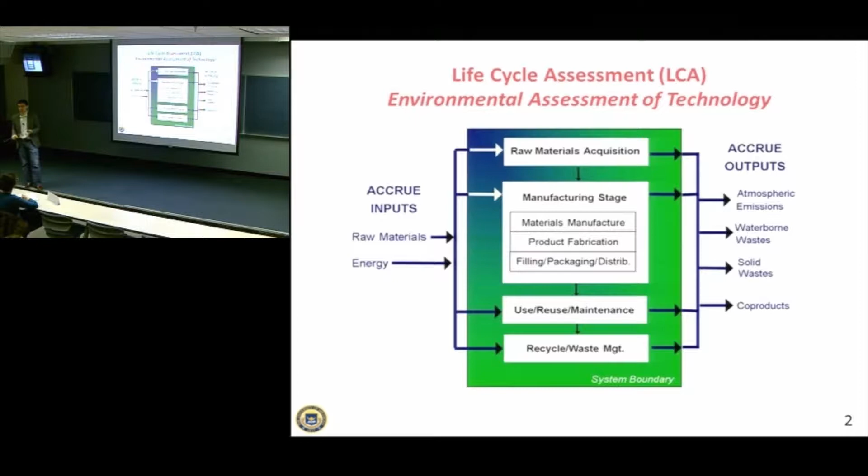We discussed what LCA is, and we talked about good LCA data and bad LCA data, and we talked about protocol there, and we tried to be really clear about what you can use an LCA for and what you can't use an LCA for.

You can use an LCA for the study of something that exists. If it's being used in a design context, as long as that design is not radically different from things that already exist, you can use literature data to infer what you might see going forward.

We use the example of the aluminum-intensive vehicle. The idea that if we lightweight the vehicle, that's great in the use phase, but there are some additional production burdens. So you want to think about the trade-off there and how long it takes for the emissions you invest in the production stage to actually be made up for in the use phase by higher fuel economy.

And LCA is great at telling us, maybe it's going to be about 3 years if your aluminum comes from North America, but we talked about geographical context, and we talked about how even in different temporal contexts, maybe your answer is going to change. And even today, just looking at aluminum that might be sourced, a typical kilogram that might come from China, that payback period might be a lot longer.

So these are important studies in and of themselves. When we start talking about sustainability, as opposed to a life cycle assessment, they're broader questions, and we went through these questions before. Would people buy such a car? Would producers have an incentive to make such a car? And if there was an alignment of those incentives, where would the aluminum come from?

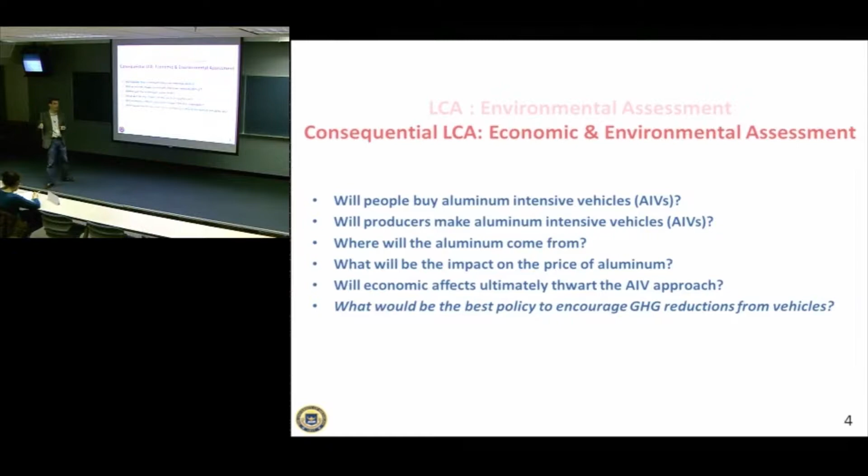Government can incentivize technology, it can incentivize research, it can tax or subsidize companies and consumers. So there are a lot of levers that are at play in the system, and ultimately, if we're thinking about an example of passenger vehicles and the desire to get the carbon emissions down significantly, the space here to act in is very large.

And how do we move beyond the food fight that exists? You've got producers saying that every cost-efficient technology has already been put on the vehicles, so there's nothing more we can do. Or the argument you hear more often these days, which is consumers will never go for it. On the other side, environmentalists say this is an imperative and company profits be damned.

So these are extremes of the argument, and rational people are somewhere in between. But the point is, how do you sift through this system in a quantitative way, the kind of way that engineers might be used to attacking a problem?

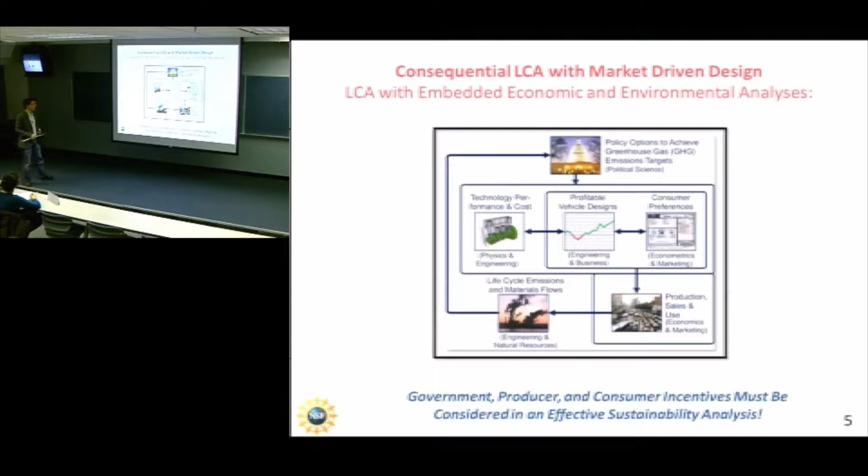So that's where we're going, and we're presenting the work in this direction that Katie did, and I'm basically expressing this the way she expressed it. I think she did a really nice job.

What I'm going to do is keep this as high level as I can, and I'll mention where appropriate that going from this slide to this slide represents about a year of work, and it's not a trivial thing. So we'll talk about the disciplines involved as we go through.

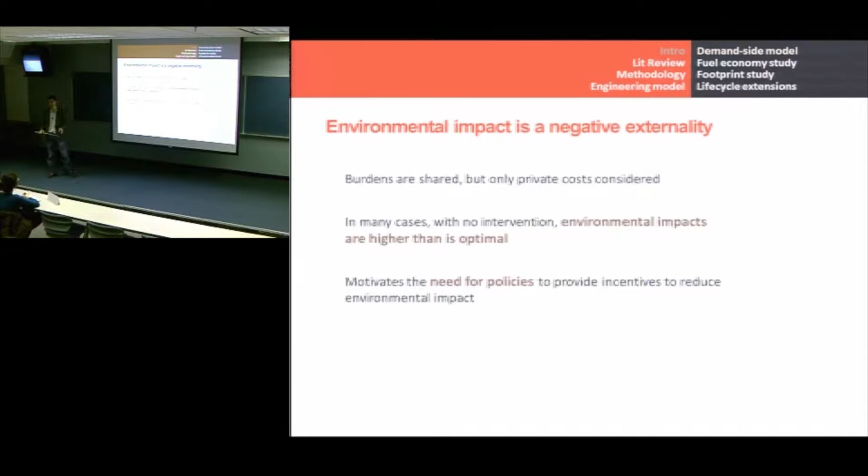And that's where policies come in. But the question is, how do you design policy, especially in a complex system such as the passenger vehicle market?

We're beginning to see now, if we take the U.S. fuel economy regulations out, more progressive regulations really in the last 10 years. Government creating incentives, let's call them carrots and sticks, to affect the design of products directly. So we're going to ban incandescent light bulbs, for instance. Fuel economy regulations have been at play for a while, but even the reformed CAFE standards kicking into effect now have a footprint basis—normalized to the size of the vehicle—and there's a design implication there.

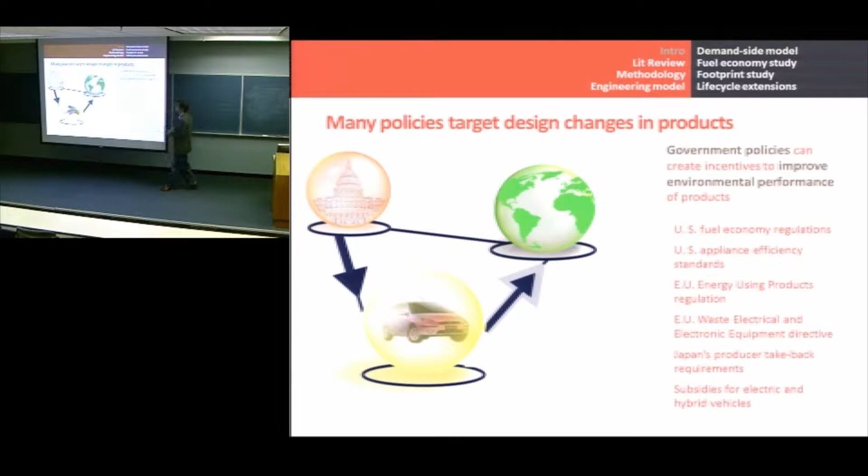Appliance efficiency standards—we've talked about the Energy Using Products Directive, the recycling directives in Europe, similar things going on in Japan. These days we're seeing subsidies for electric vehicles. So government is realizing that, especially in austere times, an ounce of prevention is worth a pound of cure, and therefore, let's see if we can influence the design stage. And that's obviously a tricky business.

So the question to ask is, if government is going to be involved in the design of products through regulation, where's the methodology? Where's the class that teaches you, or teaches them, how to do this? The point here is that it really doesn't exist. And the answer to this question—can a policy induce a desired design change—of course it can. But what's the systematic methodology to know whether you've got the right policy, and what other, perhaps unintended, consequences may arise from implementing it?

We need methods. It's somewhat self-evident, and we've discussed this enough times now, that if you're going to answer these two questions, you need to understand the interaction between demand, the engineering trade-offs and constraints driven by physics, and the economic structure of the industry and the costs of technology. There's existing literature in engineering, in economics, that's beginning to move in this direction, and even in life cycle assessment, moving this way too.

But they're sort of converging on a target—I would argue that before Katie's thesis, it really hadn't happened. So what's outlined here in this presentation is just a high-level overview of what's going on in the disciplines making contributions to this problem.

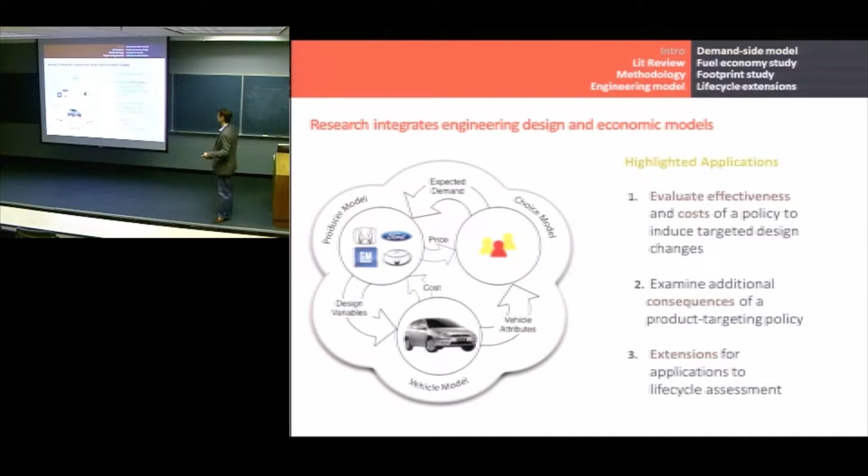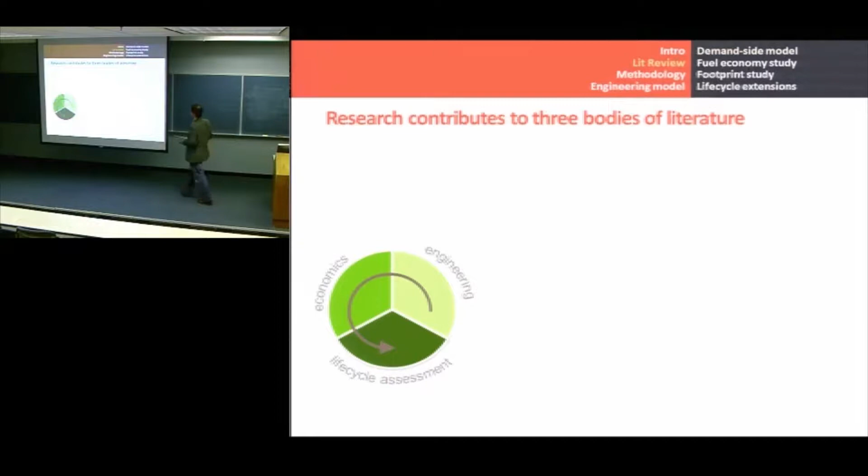Okay, so I've covered these 3 areas already: engineering, economics, and life cycle assessment. Beginning with engineering, there has been a few pieces of work recognizing how policy and economic structure come together. Professor Jeremy Michalek is a graduate of 589. Back in 2002, I think he took the course, and it was his class project that actually led to about 3 PhD dissertations down the road, including Katie's. I won't talk about what his term project was because it might intimidate people—he really got into it. But it actually opened the gateways to actually do real-world problems.

He looked at a simplified market and simplified demand models, but he actually showed that you could bring these areas together. His student at CMU is Norman Shiau, and he's done some work there. There are also 2 other students that got their doctorate looking at work bringing engineering and economics together. In the case of Paniotis and Bart here, they weren't looking at the policy side, just bringing the economic models together with the engineering models.

When you think about the math of it, and you're trying to optimize systems, you're trying to achieve environmental objectives at minimum cost—this becomes about optimization. So beneath the surface here, you don't just stick fancy models into Excel. You already had bad experiences with the solver with simple models, right? So actually figuring out how to get solutions to these problems is non-trivial. Thinking about optimal design when you bring economics and engineering together—there's been some work in that area, but you can get a sense that this has not been widely or universally pursued. This is actually a new area. I call it market-driven design, and there's less than a dozen very active researchers in that field.

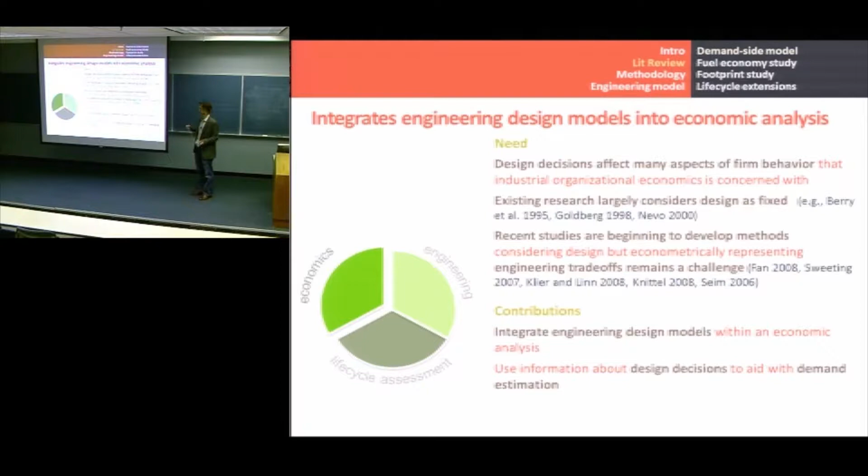The other thing you might be thinking is, what we're talking about here seems kind of obvious, right? And maybe more than one of you is a little frightened that this stuff hasn't really been going on the whole time. You just kind of assume there's so much money involved, and the greenhouse gas issue is so important, that they've nailed how to do these assessments. I don't want to say flying blind, because there have been a lot of studies, but what we're making a case here is that integrating the engineering into the economics is a pretty important thing, and really that has not been done in the kind of way most of us would be comfortable with.

So thinking about energy efficiency, now this is a bit more general, moving outside the world of cars. Typically we think about the idea of cost effectiveness. When EPA is considering applying a new regulation, they have to talk about what are the increased costs and what are the benefits to the consumer. Usually that cost-benefit analysis is as far as the whole thing goes.

What Katie is pointing out here is that there may be other benefits or opportunities that companies have to affect the design that don't show up obviously as increased costs or reduced fuel consumption or electricity consumption in the use phase. For instance, I may take a combination of technologies that gives me both higher fuel economy and higher acceleration. I can tune that combination of technologies so I'm not giving all the benefit to fuel economy — I'm giving some benefit to fuel economy, but also a benefit to acceleration, because people like that too, right?

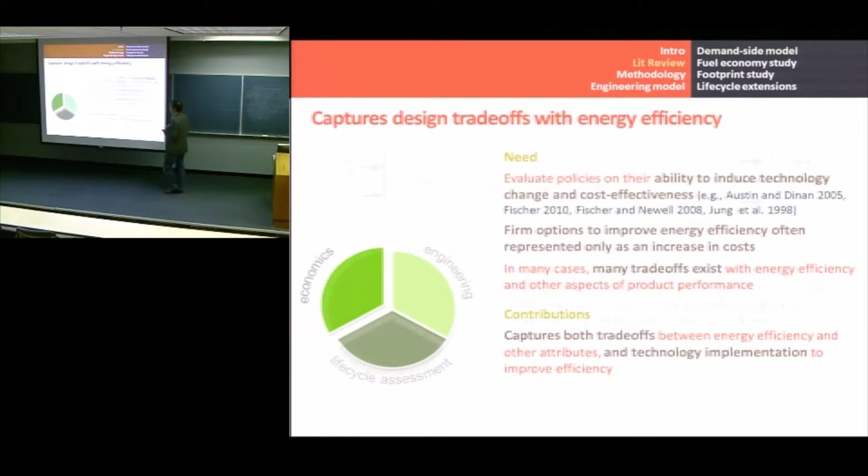A life cycle assessment we've talked a lot about, so no need to say more about what that is. What I may not have mentioned when we talked about consequential LCA was that the studies out there deal with market systems that are subject to perfect competition. Generally what we're talking about here are commodities.

A good example is fish stocks. Salmon is salmon, unless you try to sell Alaskan salmon specifically. If I want to look at Atlantic salmon and I've got a bunch of boats fishing, if I've got too many boats, the stocks deplete. As those stocks deplete, I may be more enticed to look for other fish. So if I'm interested in how fishing of salmon affects cod, fish has come up too many times this term for me to know nothing about fish, but the point is how one commodity might affect another.

That's different because you're not designing the salmon, you're only making a decision about the quantity being fished. There's been work done in that area, and some work done on ethanol. Ethanol is ethanol, it's a commodity, but you can ask where did it come from, corn or sugar? In these cases, you're just looking at a single situation - they're not designed products.

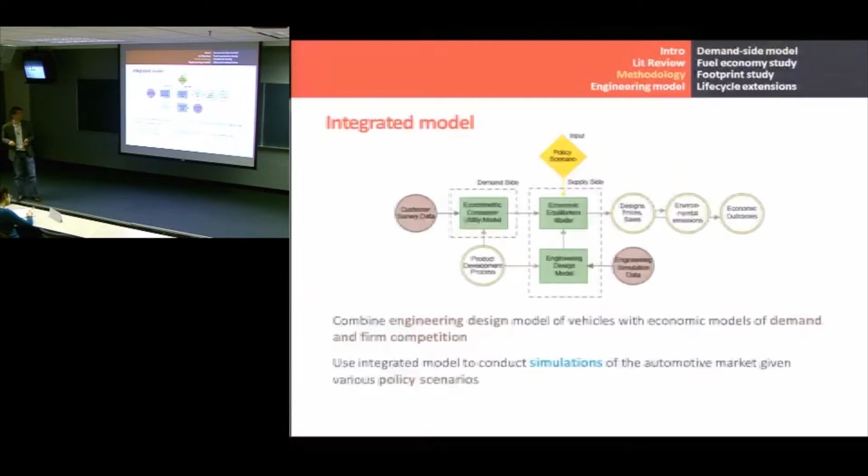So two challenges now, summarizing. First, there are engineering trade-offs between fuel economy and acceleration, and suppliers can basically tune how they land their acceleration and fuel economy by adding new technologies, and that needs to be considered in an analysis of how effective a CAFE standard is going to be, or whether cars are going to get bigger because of a CAFE standard. So there are engineering trade-offs that nobody's really addressed before, and then this idea that if companies are going to take on technologies that are uncommon today, then we really need that engineering design component.

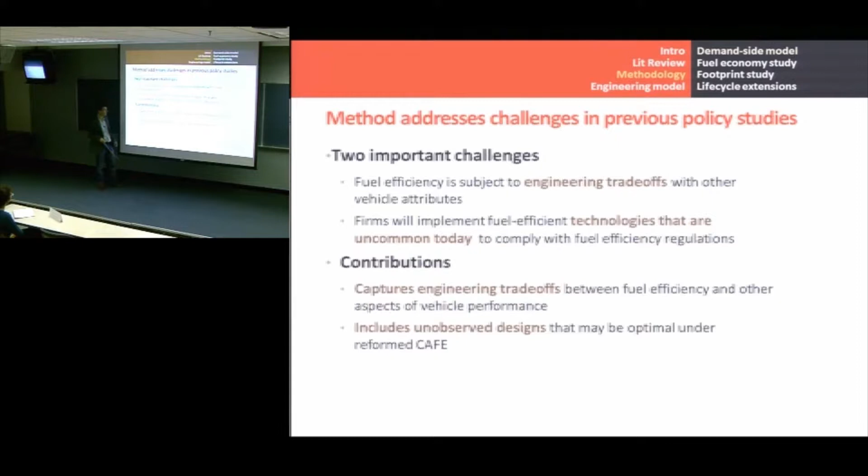So walking through here now, the things that need to be thought about, beginning with the product development process. We've talked about the importance of focusing on the medium term, and this gets into some technical issues, but basically describing the product development process as a three-stage process.

So you don't decide the price first and then figure out the dimensions of the car. This is sort of your order of operations for product development. You begin with a concept that has the vehicle segment that this car is going into. You've got a certain powertrain architecture going on there with certain dimensions. And then the concept gets approved, and now you say, okay, we're going to design the engineering subsystem.

We're going to make a 4-liter engine versus a 3-liter engine. It's going to have a certain number of cylinders. We're going to throw some technology on there. Maybe there's going to be some cylinder deactivation. You don't do that up at the front, and you can't change it after you've started production.

Pricing occurs after production, and if you pay attention to these things, you see they change, right? This is important because if you're going to estimate a model, if you're going to try to figure out characteristics of the market from market data, you need to be able to tease out some factors relative to others. So if you know that at this point or at this point here that some of these things are static, it actually, from a technical perspective, helps you perform a better estimation.

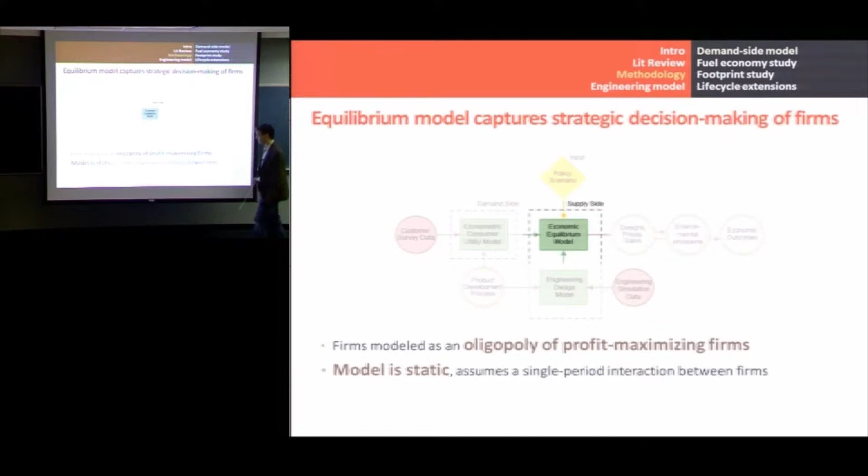Model is static versus dynamic. Okay, some math—don't get scared, this is not anything tricky here. This is profit. This is one firm.

J are the cars that the company is planning to make. So maybe I'm a car company and I have 75 vehicles or 100 vehicles, and each of those is a J. I have a quantity sold for each of those cars, and for each of those cars it has a price and it has a cost. So it makes sense that profit is going to be the price you get minus the cost times the number you sold. And then you just look at that for all the cars.

Maximize the profit. You're going to make sure that this is subject to any regulations, like the CAFE standards. And then there is some technical business going on here.

Basically, what Katie shows through some engineering reasoning is that you can create a function of the acceleration of the vehicle plus the technology that's been slapped on it to figure out its fuel economy. EFF is efficiency—fuel efficiency or fuel economy. What this says is that there's some fixed and variable costs, and you can figure that out as a function of the acceleration and the technology.

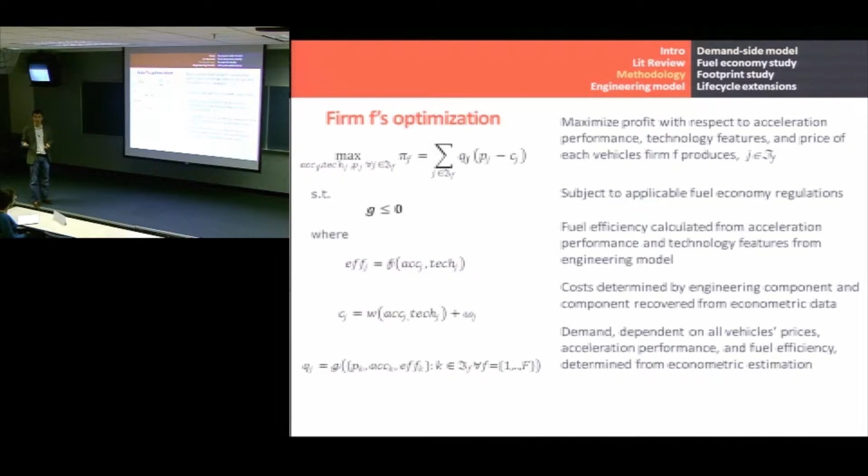And then your quantity demanded is going to be a function of the price. It's going to be a function of acceleration. It's going to be a function of the fuel economy as well as the structure of the market. So yeah, to understand the details here, it's a little bit to think about, but nothing is particularly counterintuitive going on. And as I said already, that was one firm's profit function.

Well, there may be 20 firms there. So what she does is start with an initial condition. Let's say there's 500 cars, and let's say there's just 10 firms, so I can do the math in my head—that's 50 cars per firm.

So what I do is initialize the run, and I say, okay, they have a certain gear ratio, they have a certain engine size, they're using certain technologies, and that means directly out of that there's going to be an acceleration, there's going to be a fuel economy, there's going to be a set of prices, and a certain profit. And that's just like an initial guess—it's not coming from anywhere. So you initialized all the firms.

Now, firm 1 is going to look at the other 9 firms, because I just said there was 10 firms, and say, okay, given their initial condition, here's my optimal set of prices, here's my optimal design. Then firm 2 is going to look at what firm 1 did, and the other 8, and make a decision for itself. Then firm 3 does that, and firm 4, and it's going to go around and around for about a day—if you're lucky, maybe 2 days—and you're going to converge on an equilibrium point.

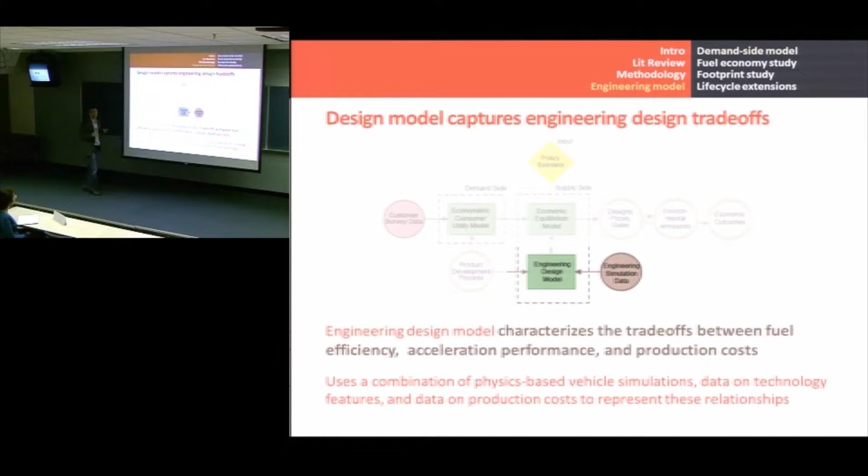So we've got now a model of equilibrium. Now we need the engineering design model and the consumer utility model. And everything I've set up to now turns out to be pretty easy, but these 2 boxes, especially figuring out how to do it the first time, that was maybe worthy of 2 PhDs.

So if you just look at the technology combinations, let's count: 1, 2, 3, 4, 5, 6, 7, 8 technologies. So basically I've got 2 to the 8th combinations, maybe 256 combinations of technologies. And each one is going to have a different cost, a different impact on the performance of the vehicle, and the market's going to respond differently to every one of those.

So you can imagine if you just try to brute force this, enumerate it. Remember the coffee maker disassembly problem, where it would take 16 years just to look at the disassembly combinations. This maybe has fewer innate combinations, but because you have to run this game theory every time, forget it. There's no way you could just brute force this out.

So what Katie needed to think about was a bunch of things. One is, how are you going to code this problem in a way that is realistic but can be tackled by a computer?

The first thing you do, like in the disassembly problem, is look for combinations of solutions that make sense from a cost perspective. So if I've got 256 combinations I can put on any one vehicle, and the largest firm has 116 vehicles to optimize, I'll only look at maybe the compact segment, say 70 of them that are cost effective. The other 180 or so don't make sense, because in any of those cases you could pick one of the 70 for the same money or less.

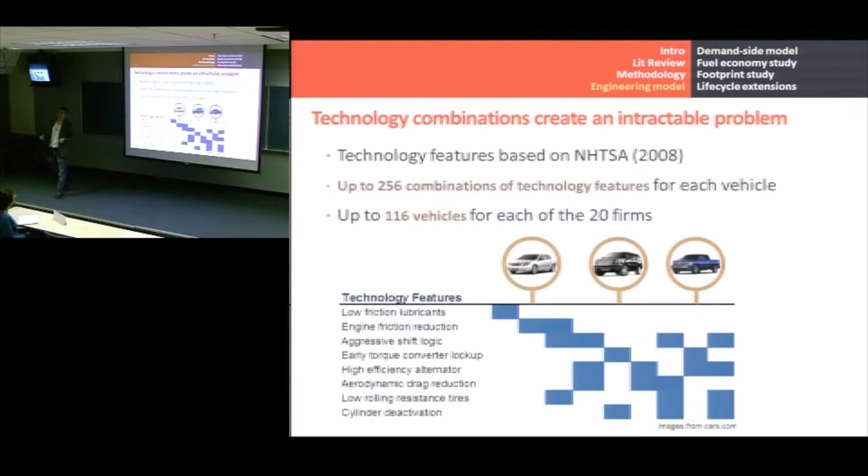So she had to establish the cost-effective combinations of technologies. She also then needed to map those technologies onto each segment.

So what she did was look at 7 vehicle segments defined by EPA, and then modeled a representative car, maybe a Civic. For that representative car, without any technology on it, figure out what the trade-off is between acceleration and fuel economy if you just change the engine and the gearing.

I may not have every one of these options, but I can model it as a continuous curve. By having continuous curves, the optimization is a lot easier. If you just look at discrete points, it becomes a nightmare. So that's part of what's going on here.

And then you can work your way down. If you want to break out of this curve and do better in both acceleration and fuel economy, you slap a technology package on there. So maybe technology combination 1 gets you this curve, and technology option set 2 gets you this other curve.

After you're able to produce the first curve with your baseline vehicle, and model how these technology packages would look if slapped onto that baseline vehicle, you would then think about what the costs are. What is the cost of being here versus the cost of being here? And then you would construct a cost curve this way.

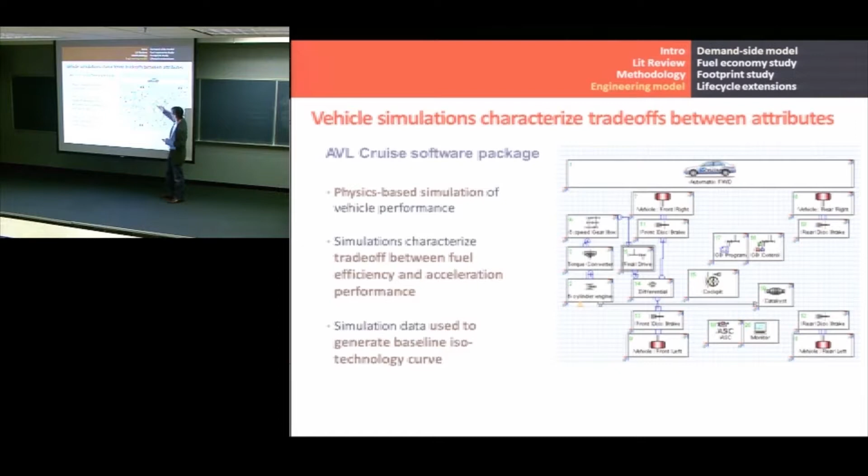So looking at the baseline model here, these are the representative vehicles.

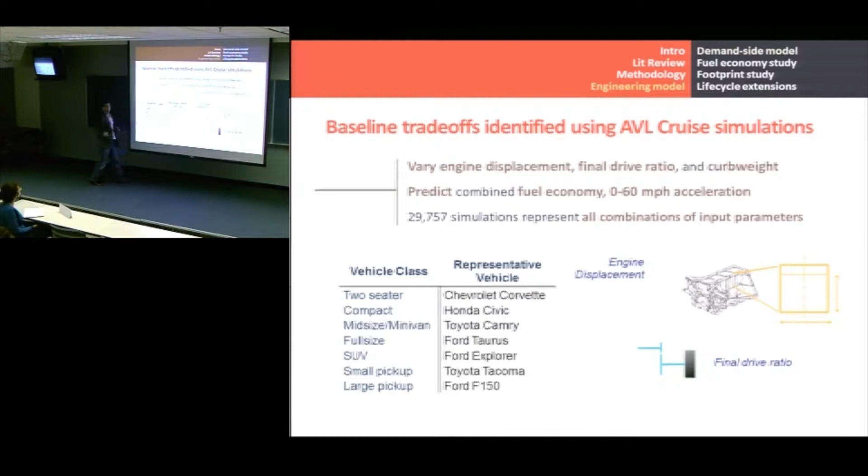And I've mentioned already the engine size, changing that, changing the gearing. Oh, and the curb weight's an option here too. Curb weight wasn't a decision variable, but it was one that she carried along in her simulations. And again, about 30,000 simulations, so that took some time itself.

The costs also came from EPA and NHTSA. So thinking about now, this was the class project actually in 589, this was part of the class project. It's figuring out how engine costs vary with size, and then looking at, from the literature, the cost of technology features.

And if you're using two technologies, in her model, she's treating the costs as additive, so that there may not be an efficiency between, say, turbocharging and cylinder deactivation or something like this. And there's some support in the literature that this actually makes sense, but

Katie was not using the secret store of data that companies might have on these actual costs. So basically, just talking here about the cost being additively separated here.

So I mentioned this too. How do you get this baseline curve? These are her simulations, and maybe this is your Honda Civic. You're looking at the different engine sizes that might be simulated in AVL Cruise.

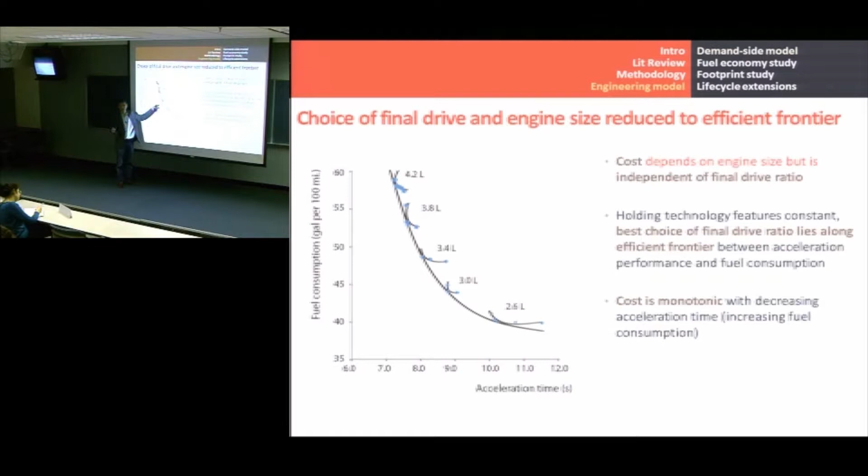So she actually used the AVL Cruise to figure out what those acceleration values would be. So that's how she actually made these Pareto sets here. Okay?

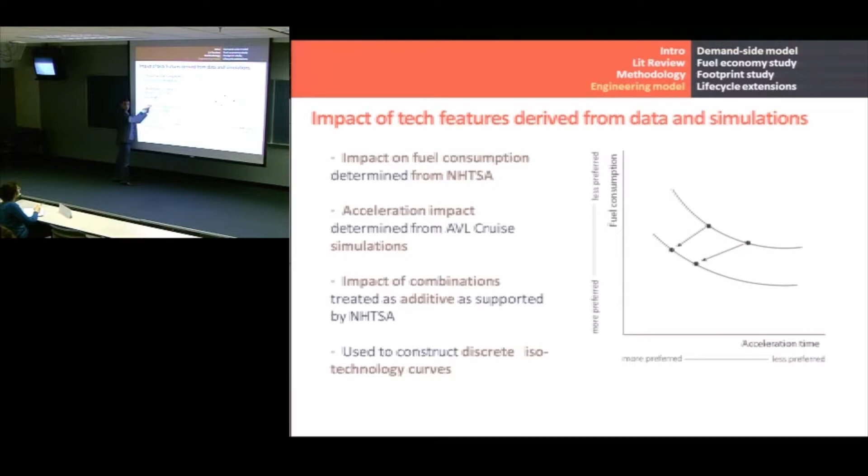So the impact on fuel consumption for a technology came from NHTSA, a couple of cases EPA, and then she actually figured out what the acceleration impact would be. And that allowed the creation of these curves.

Okay? So I basically said this already, right? You've got the baseline vehicle, and then you've got levels of this technology variable. And then she's treating this technology variable as if it's continuous.

So there's really two things going on here. One is, when I explain it, it sounds like a lot of work, but it sounds doable, and that's true. But one of the contributions was actually thinking through the process to achieve this, and that was not easy. We hit a lot of brick walls before we came on this.

Okay, does it make sense? Basically, what's going on in the engineering side of the equation? What needs to happen? That's why engineers need to be involved.

We didn't have costs, and the further we got into this, the more we began to realize that maybe the people who are actually making the decisions about design, they may not fully understand the costs either. And so, we basically, from the outside then, we built our own model for both fuel economy, it's called EFF here, and cost.

So K's are model parameters. You don't want to ask how she got this model form, because that model form is just brute force. Let's figure out what works. You see some exponentials here, some linear terms, some quadratic terms. There's a lot of brute force going on there.

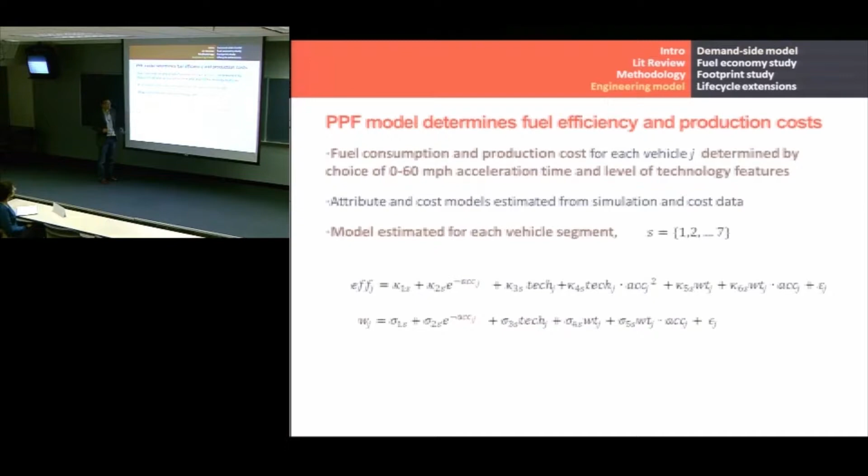So we didn't think that it would look this good in the end. We'll take it. I mean, you'd like 0.99, no doubt. And probably that model form is out there. But considering all the things we're not modeling, we'll take it.

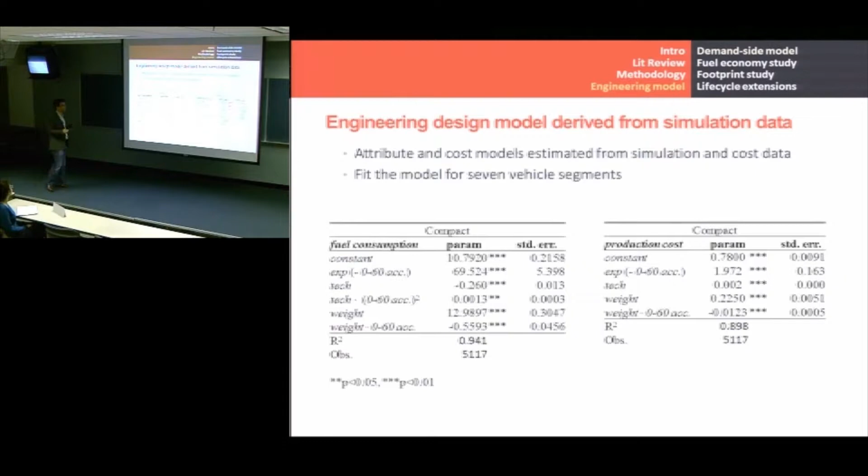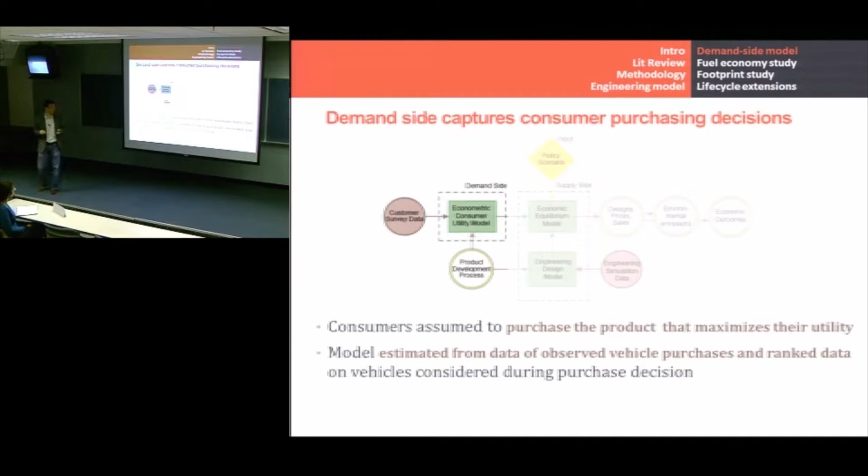If you thought this was hard, I think you could follow that. This part, this is at least two courses in economics, maybe three or four. This is a model of utility. So you're looking at utility here.

There's no way to observe utility. Utility is, I've got a car. I drove a Subaru today to work. What's my utility? I got no idea. And there's no question anybody can ask me for them to figure out what utility is. It's just not really a knowable thing.

But what you can do is try to come up with some structure to the utility, and then say, I don't really know what utility is, but I'm going to make an assumption that consumers are going to try to maximize it. And under the assumption that consumers are maximizing their utility, given the ability to observe the market, you could actually figure out what the maximizing utilities were and derive coefficients that say something about utility.

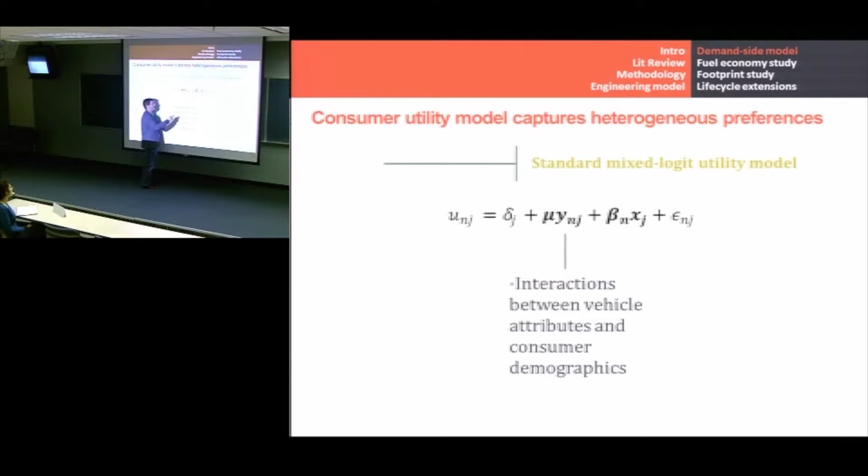So N is consumers, which are represented by their demographics, and J is vehicle.

Now, where this gets really tricky is that there are features in the system, leather seats, a certain styling, handling, noise, that really affect how much utility a vehicle has to a person that you're never going to observe. So you may have a confounding between things you are observing, like fuel economy or price, and things you're not observing, like luxury.

So that's where your courses in economics come in, and this becomes an art form. Something that doesn't look all that hard, say, well, this is just some Greek letters, I can figure it out in a day or two, becomes a lot of practice, a lot of research papers, and something that in practice is closer to an art form than a science.

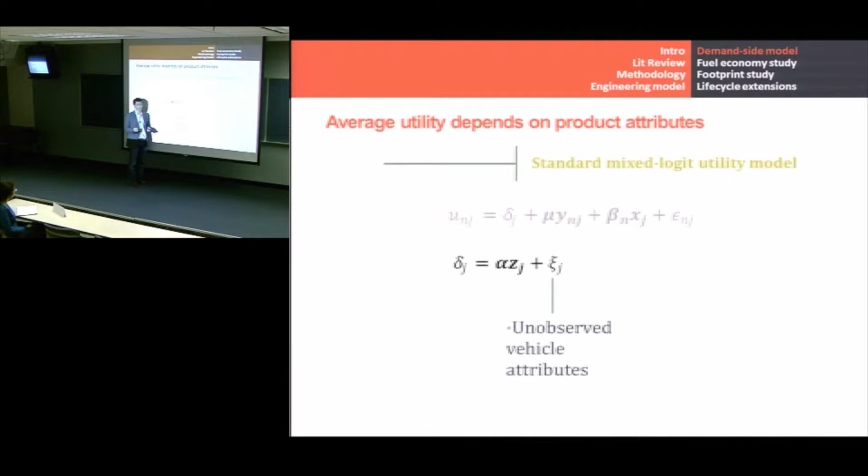Remember I said these new car surveys, they have the car that was bought, and then the second choice question of, okay, if you didn't buy that car, what car would you have bought? And if you didn't buy that one, which car would you have bought? And those data, a lot of those data were available to Katie. So basically looking at the one that was bought, the first choice, the second choice, etc., you can use that information to figure out what the alphas, what the mu's, what the betas essentially are.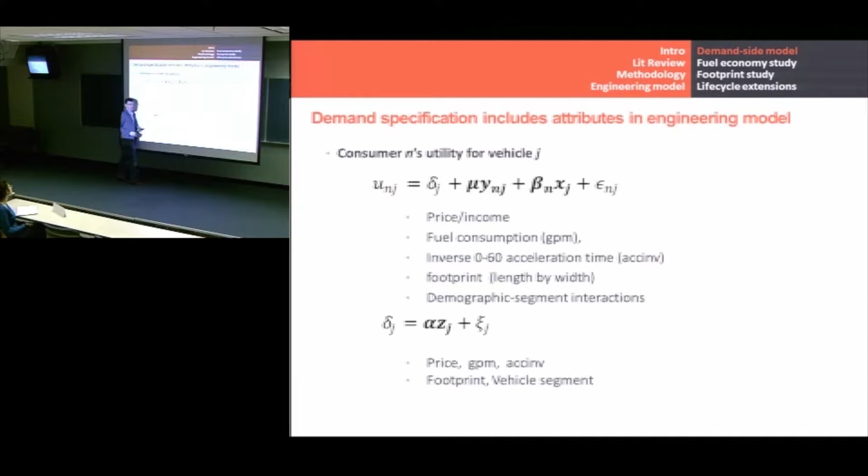And there's some heterogeneity going on here that I'm not talking about. But basically, you use the market shares that maximize the likelihood that what was observed in the market in terms of market shares, first preference, second preference, etc., were actually met. So that's how it's done in words. Obviously, it's tricky.

And in doing this, you can get a whole bunch of parameters. And when you actually do a sanity check on those parameters, you're glad to see that some things you would expect come out. First being that there are a lot of people who think about price elasticity. So if I change the price of the vehicle, then how's the market share going to change? You can compare that with what other people did using different methods, and if you get numbers that are close, you feel good about that, right?

That's good. You can look at whether the willingness to pay for improved fuel economy is less than the cost of the technology features. That's intuitive because if the willingness to pay for improved fuel economy is higher than the cost to put the technology on, you'd see it in the market already. So you kind of have this sigh of relief when you see this, right? So these are sanity checks. It's not proof that this model is good, but these are the kinds of things you can do in addition to doing statistical tests, which I just blew over on the last slide.

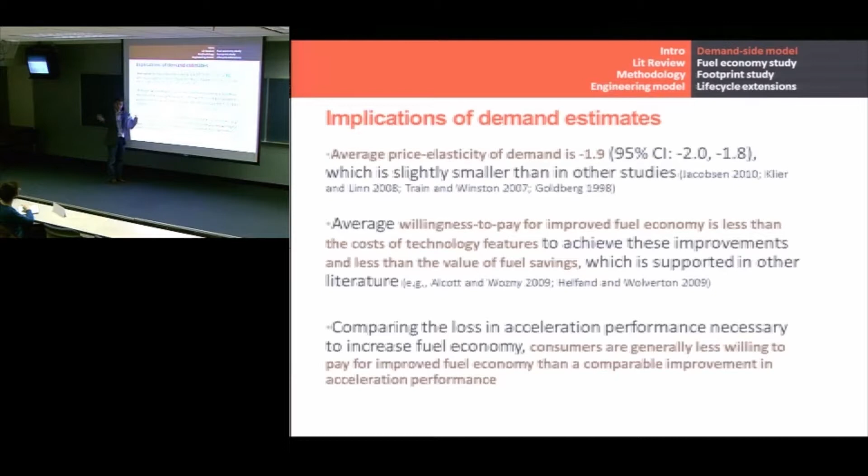It's hard. So when I started off the presentation today saying these economists haven't thought of design, I hope you didn't get the idea that they weren't smart enough to do it. They were. But they're busy tackling all these other challenges associated with these kinds of studies. It is not easy, and that makes Katie's work even more impressive because she's able to understand both and actually integrate them together. It's non-trivial.

Costs - so I've talked about technology costs. I talked about that 589 project that told us how engine size might be related to the cost of an engine, and I talked about NHTSA and EPA data that might help us understand what the costs might be for technology packages. But I didn't talk about the cost of the vehicle. Where does that come from?

Well, basically that comes from looking at the existing market, existing vehicles, right? Everything besides the engine, besides the technology - we need to understand those costs. So that comes by looking at the existing market. You assume that companies have set their prices to be profit optimal, which means you know the quantities, you know the prices, and you can then figure out the cost by applying first order conditions.

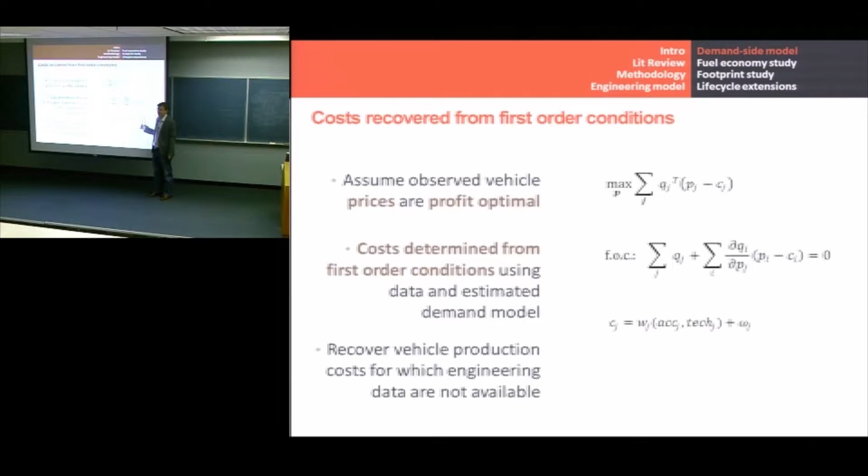Take the derivative, set it equal to zero - there's an equation that needs to be met there. And then by applying a certain structure to the cost equation, you can figure out what the costs are. Again, not easy, but it's doable. And those costs are going to depend on whether you're constrained to CAFE or not.

So here's another wrinkle: not all firms constrain themselves to CAFE, right? You've got some European automakers willing to pay the CAFE fines because they're not very high. You've got the domestics that do pay attention to CAFE, naturally worried about being sued, so they just meet it, whether out of moral or financial or legal concern. Then you've got some Asian firms that are way above the CAFE standard and don't have to pay attention to it. So the cost structure needs to be considered - some of those costs are penalty costs and some are actual vehicle costs.

So you need to be able to back those things out too, and she did it, okay?

And this is where I'm going to end. I'd hate to just present to you a CAFE study or a footprint study without giving you some idea what's actually going on there. And we've done that. Now we can have the fun - we can say, okay, we've built this machine, now let's go stick a CAFE standard in there and figure out what happens.

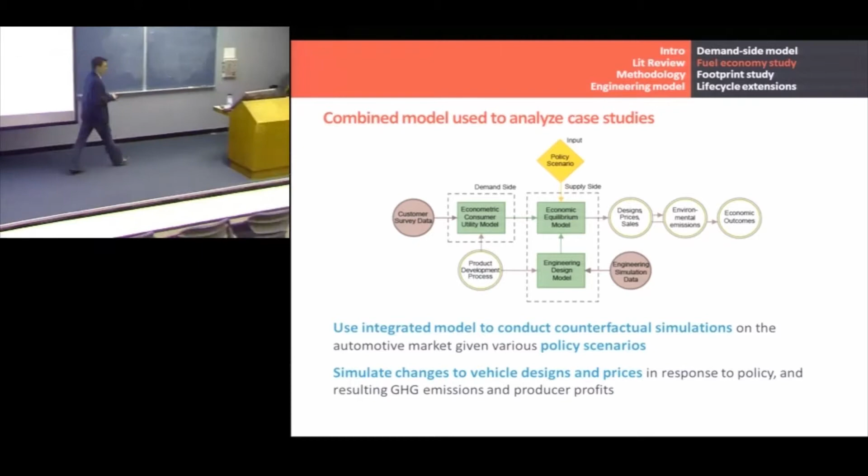So we're going to look at two case studies. The first is looking at the CAFE standards as they're applied in 2014. So let me just get this thing working.

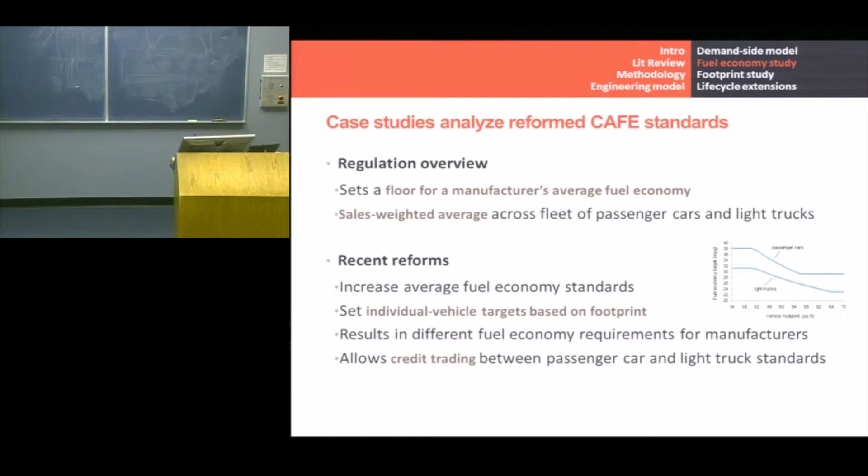So looking at what that regulation is - I think we've talked about the corporate average fuel economy standards enough in class. You know they've been kind of stuck at 27.5 for passenger cars for a long time, and the idea now is that starting in 2012, they're going to ratchet up. And what Katie did was she looked at where those standards are going to be in 2014.

And what it's all about is, if you're an automaker selling different cars and trucks, you can basically take the sales-weighted mix, and you want to make sure that average sales-weighted fuel economy is higher than a baseline level, 27.5, going up from there. So one of the recent reforms, in addition to increasing the standard, was making the targets based on the footprint of the car - you look between the wheels, between the axles, and you get a footprint.

If you have a larger footprint, your target goes down. That would look something like this - it's a little small, I'll show a bigger version in a few minutes. This is vehicle footprint on the x-axis, and fuel economy on the y-axis. You see it's level, and then for light trucks it comes down.

The other thing is credit trading. So if you do better on cars, maybe you can give a bit on the trucks. We've talked about tradable permits - same kind of idea. You can do credit trading between the passenger car and the light truck standards.

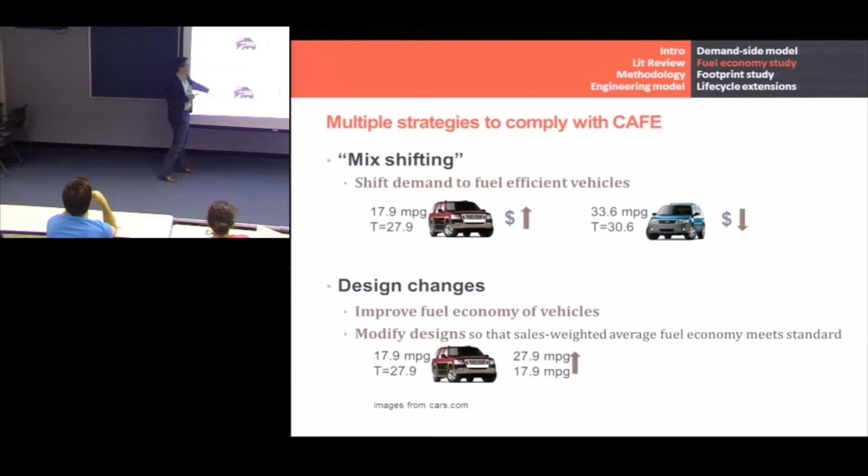The case she's making is that the short run may overestimate the cost, because it may be cheaper to do this in the medium run than in the short run. So we need studies that look not just at the short term but the medium term. She argues the short term may not be relevant anyway, because firms are generally given 3 to 5 years warning so they can actually make design changes to comply with CAFE standards.

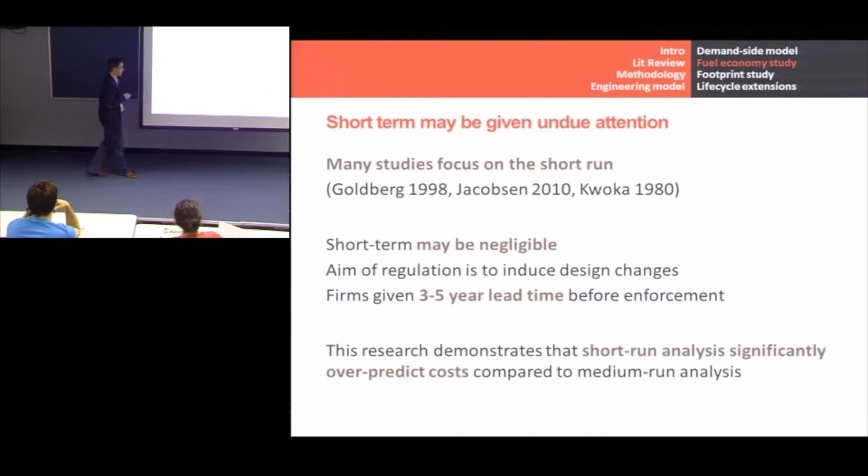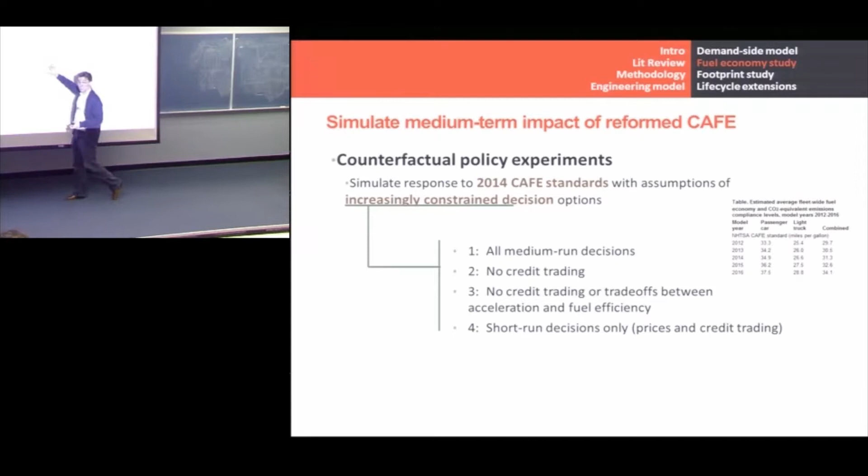Basically in 2012, standards rose from 33.3 miles per gallon for passenger cars up to 34.9 by 2014. What she did was, given the data set available when she started her work, we had 2006 cars - she looked at roughly 500 vehicles across 20 firms.

They took that 2006 fleet and said, okay, we can make some design changes, we can add these technologies - remember these technology packages - and figure out which vehicles get which packages. She looked at 4 different cases.

One is basically thinking about the medium run like we've been talking about - this is just modeling the policy as it is. She looked at taking the credit trading out, and then taking out the credit trading while also ignoring the trade-offs that occur between acceleration and fuel efficiency.

This is another tough point in some prior analyses - you can make vehicles more fuel efficient, but often acceleration goes down, which affects market share. So she wanted to decompose that effect: she took out the credit trading, then she took out the trade-off issue.

Then she looked at only the short term and what that would tell you. The idea was: what can this methodology tell you about how important credit trading is, how important it is to consider these engineering trade-offs in sales, and how important it is to look at the design at all. Does this make sense, what she's trying to do here?

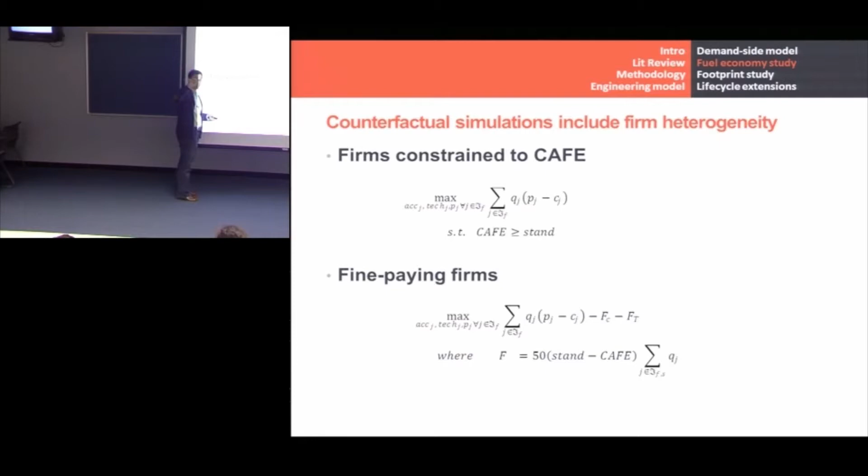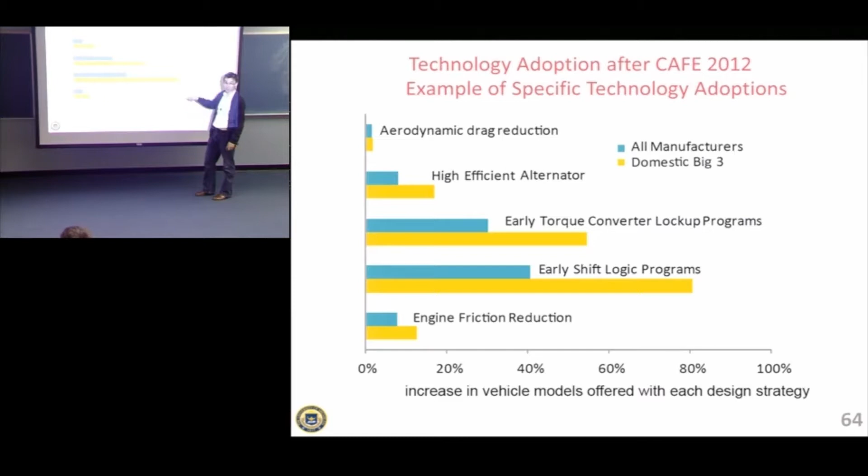So remember, she was looking at, I think, 7 different technologies, and you can begin to say, okay, well, the domestic automaker is going to take up basically all of these more than the auto industry as a whole, right? Now, you shouldn't walk away with this as being a result. This is an example of the kinds of things the methodology can tell you. This is, I think, one of the big contributions of her work.

So if you look at how EPA looks at environmental regulations, I think most of you have heard of this idea of costs and benefits, right? So we look at cost-benefit analysis. And the benefit has to do with the consumer willingness to pay. So what is a customer willing to pay for a 1 mile per gallon increase in fuel economy? And they're looking for a number. And you can go into the literature and you just see all these reports with all these different numbers.

And what Katie suggests that I think will resonate with everybody is that number doesn't exist. That number is going to be different for you. It's going to be different for me. It's going to be different in different segments. And really, there's a distribution across the population, right?

I mean, if you think about the fact that fuel economy and acceleration are related to one another, right? You look at these European vehicles, where you've got maybe high acceleration and very expensive cars. You could think of that as actually, where your miles per gallon is actually a negative attribute, because it's really the people buying those cars are only concerned with acceleration.

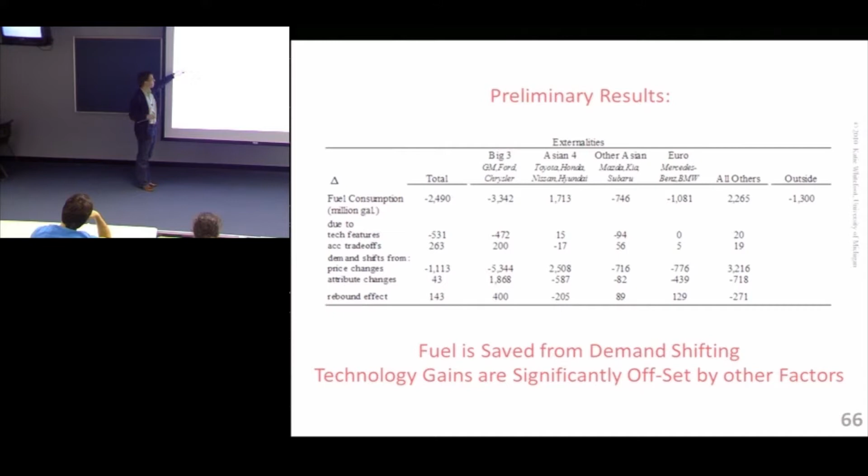So what it tells you, talking more about the magnitudes than the actual numbers, is that some amount of the benefit you get from applying technology to reduce fuel consumption is actually eaten up by using that technology to improve acceleration instead, to get market share back.

You also see a large number here—this is your mix shifting. I don't want to say that companies don't adapt their prices to get more people buying higher fuel economy vehicles. They do. But the point is that design is also important.

You can also look at the rebound effect. As you increase fuel economy, people generally drive more. You can make certain assumptions about it and compare the magnitude to this one, and conclude that the rebound effect probably isn't all that important.

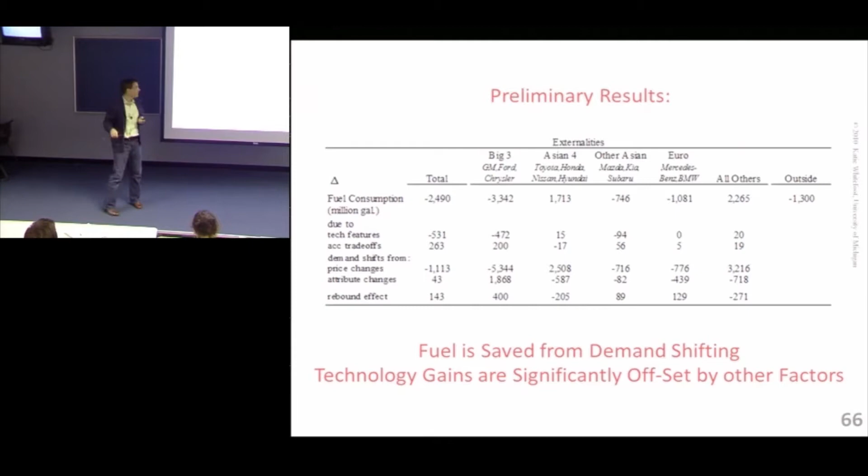You can also slice this by automaker. So you've got the big three, the folks in Asia who are above the standard, and others who aren't, and look at the impacts of the regulations on each.

Now, the example I do want to show you with numbers is looking at the four cases outlined a few minutes ago—basically Katie's simulation of the policy in just the short run. Let's start with the beginning and the end. If you assume the only thing producers can do to get people to buy vehicles with higher fuel economy is change prices, this is going to be very expensive for producers.

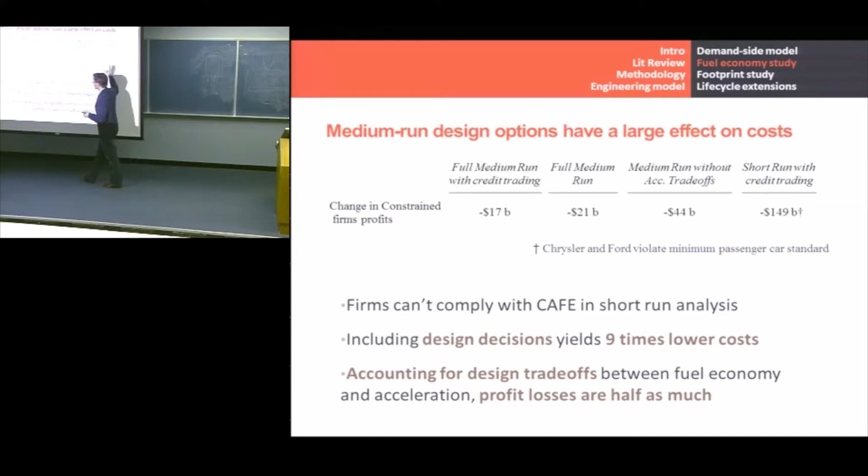There's a lot you can do with this kind of analysis. In the end, you might be interested from the environmental perspective—this is more the economic perspective—in whether the full fuel economy gains are actually going to be seen or not.

So basically, what comes out of the analysis is that shifts in what's produced account for about 38% of the gains, and about 62% of the gains are actually due to changes in design. So again, design is important.

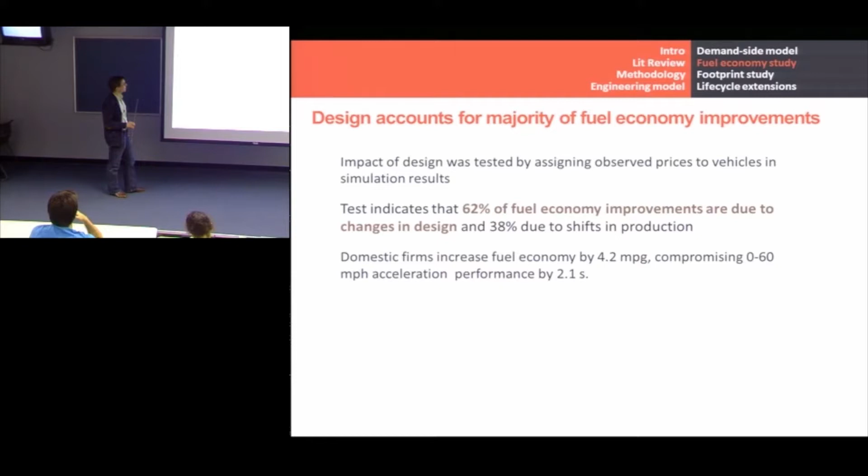Domestic firms increase their fuel economy by about 4 miles per gallon relative to where they were in the 2006 case. So one thing that came out of this is that as domestic firms increase their fuel economy, there's essentially attributes left on the table that are performance attributes, acceleration in particular, that previously was being met by domestic firms, but now they have to increase their fuel economy.

And there's a question as to whether the firms that are already above CAFE are going to swoop in and start making muscle cars, basically. Let's take Toyota, let's take Honda, and say, oh, actually, without violating the standard, they can come in and take that off the table, if you will.

So what she saw in the simulations was a pretty strong shift in sales to foreign firms that was sort of resulting from this increase on the basis of higher fuel economy and the domestic firms constraining themselves to CAFE.

Now, just because the model says that this could happen doesn't mean it will happen, right? There's Honda and Toyota now above the standard. Maybe they're going to stay above the standard, right? But the point is that there is a significant impact for leakage, and that would decrease overall fuel economy by about 1.5 miles per gallon.

Questions? It's making sense.

In the end, it isn't about the numbers. You don't go through two years of work because you think that fuel economy is going to drop 1.9 versus 1.8, or the overall domestics go up by 4 versus 3.5. You do it because you discover something that might be general, and you've got a very strong basis for it, and you want to alert folks to it. Right? So this leakage effect was fairly significant.

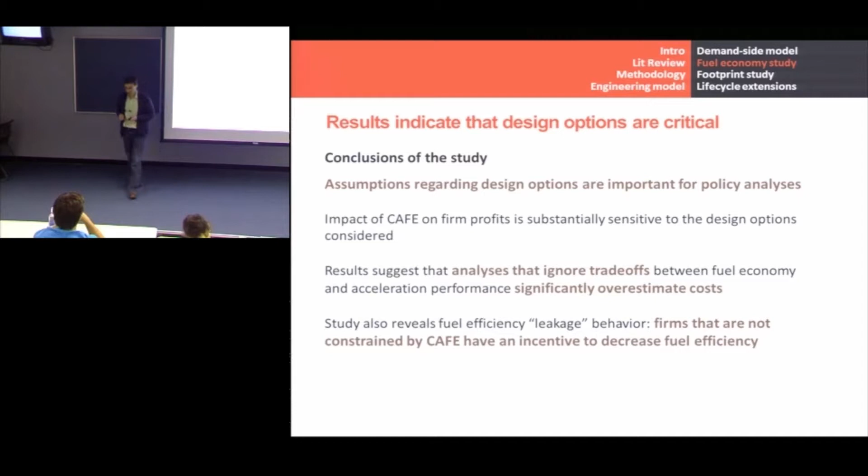Okay, and in her second case study, she had a different concern, about cars getting bigger. So it stands to reason that if you tie the fuel economy standards to footprint, you say, well, you don't have to hit as high of a target if your footprint is bigger, that maybe a firm out there might decide to make a bigger car, a bigger truck, bigger footprint. And there were enough people saying that wouldn't happen, based on analyses that didn't incorporate the things we've been talking about for the last day and a half, that it begged for the analysis to happen.

Okay, and that's what the second case study is really all about. It's about whether the implementation of the reformed CAFE standards will make cars bigger, and if so, would that reduce the overall benefit from the environmental perspective of the policy? All right. Am I making sense?

I have to ask you because I got no idea. So that's basically what's being said on this slide. So looking at the potential incentive—go ahead.

Were there curves before these new CAFE standards? How did they determine what the fuel economy should be? So this is new, this is with the reform standards. It wasn't based on footprint. So the reformed CAFE did that.

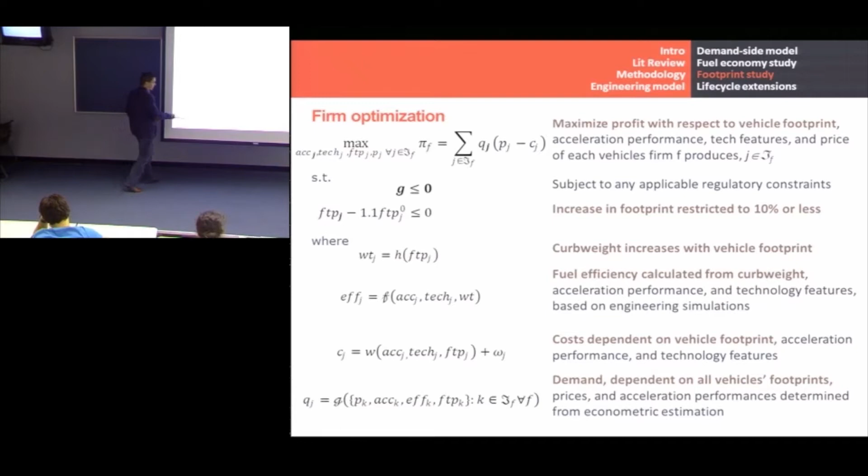The demand function changed from before, and those are details you can read about in the paper. I've mentioned she had to figure out how the weight changes with footprint size.

What's interesting here is it's not one-to-one. There's a significant fraction of components of the vehicle that are independent of the vehicle dimensions. Some don't vary with footprint but vary with height, and when you add up the two, it's about 50%. So a 1% increase in footprint, and this is an assumption, results in 0.5% increase in curb weight. She did a sensitivity analysis of that assumption. But the key thing is it's not one-to-one, it's less than one-to-one, in the range of maybe 0.4 to 0.6.

That matters a lot, because if you assume weight increases with footprint at a one-to-one correspondence, then your incentive to increase footprint is going to be lower. Just think about it in the extreme: if you increase the vehicle footprint a little bit and it gets way heavier, that's going to reduce the performance across the board of the vehicle. So she had to investigate what these numbers are likely to be, and she found it's between 0.4 and 0.6.

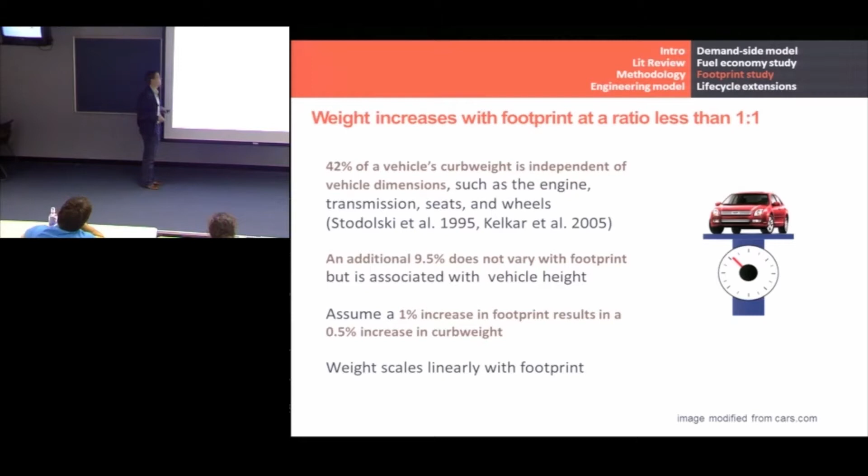Now, production costs - I mentioned we really had no idea after talking with some brilliant people in the industry. We just had no idea. So the assumption here is that costs increase with footprint at a one-to-one ratio.

Now, you'd say there's no way it increases at a one-to-one ratio, because you've got body panels, glass, and a bunch of components that just are not going to scale that way - they're going to scale much less. This was a conservative assumption, because if you assume it costs more to increase the size of a vehicle than it actually does, and you still see producers doing that in the simulation, even though it was more expensive in the simulation than in reality, you can be pretty sure it's going to happen in reality. So this was a very conservative assumption baked in here, just because of the lack of information we had to model that appropriately.

And of course, if it's less than one-to-one, then the footprint grows more. Make sense? All right, so now you get into some of the compromises you have to make when doing an analysis like this, even when doing your PhD on it.

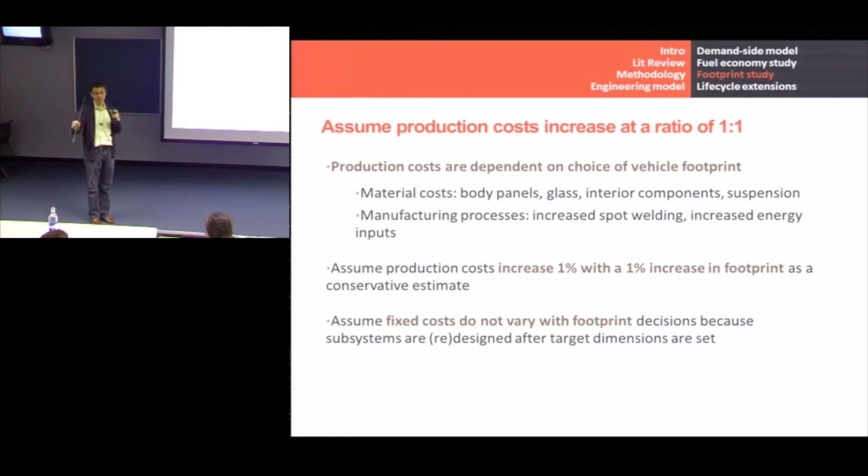The other assumption, which we were told was a good one from people who knew, is that in the range of footprint variations we're talking about, the fixed costs don't really change, because on this time scale you're not really going to be paying more for the capital up front just because the footprint's about 10% bigger, or 5% bigger or something like that. So we made what we think is a realistic and very conservative assumption here.

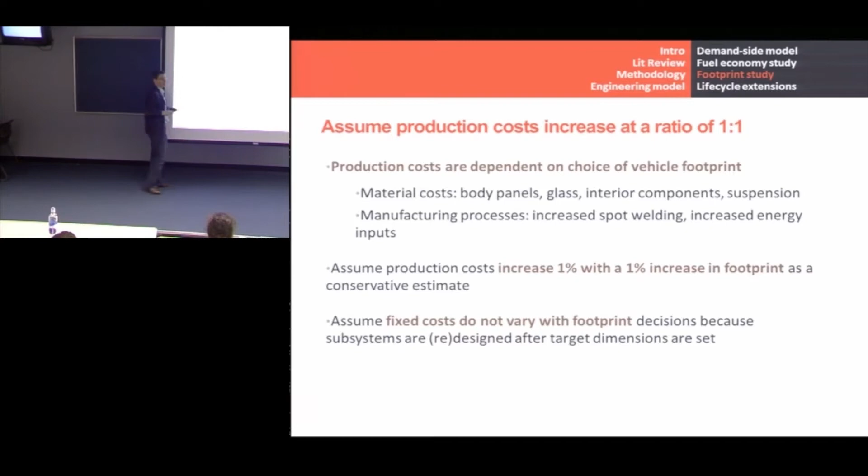So the demand parameters from the literature are all over the place. We talked about price elasticity last time, ranging from 2 to 3.1 - this is how, if the price goes up, how much less likely a person is to buy the vehicle. Expressed as willingness to pay, I think these are more intuitive. So this is per square foot on the footprint, a range of $340 to $2,000.

Acceleration is different here - it's not 0 to 60 time, it's expressed as horsepower to weight ratio. So if you have more horses and less weight, you're going to have more acceleration. That's how it's expressed here, because most of the studies were taking it this way - they weren't using simulations the way we were. So $160 to $5,500 there.

And now fuel economy, in the range - this is not miles per gallon, this is gallons per 100 miles. So $800 to $9,000.

Very wide ranges looking at all corners of the space, running the simulation and asking whether cars get bigger. She found that they do, except in the case where people have a low preference for footprint and a high preference, at the extreme high and low ends of fuel efficiency and acceleration, the values on the other side are zero. In almost all cases, vehicles get bigger, and the average fuel economy observed is 1.4 to 3.9 miles per gallon lower than if sales and size were not affected.

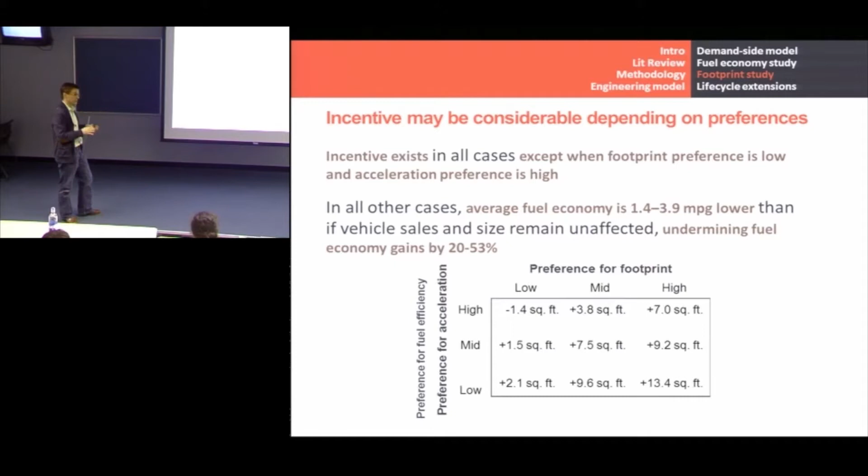Does the CAFE standard apply to gross vehicle weight or to footprint? You have different size classes - light trucks and passenger cars - and that's where weight comes into it. This is a footprint-based standard, so you've got different footprint standards for those two classes. Weight is varied as an effect of footprint. They considered doing this by weight, but they didn't, and I don't know why. I have guesses, but I don't want to share them.

There's actually one study that was done looking at weight a long time ago, which you might be interested in. Other questions? It's a good question.

Is there any historical data that you guys looked at? I happened just a week ago to be talking over Thanksgiving with my brother about cars, and he was arguing, and I haven't looked this up, that cars today are so much larger than cars 20, 30 years ago, that even though we've increased the efficiency of vehicles and added catalytic converters, we're still worse off because our cars got bigger.

If you look at - I didn't bring the plot, but I think we looked at it earlier in the term - the average fuel economy of the fleet: basically when CAFE was ramping up in the 80s, you saw increases in fuel economy. Then the automakers met the target, sat there, and the cars still got more efficient. Absolutely, they got more efficient, but that efficiency wasn't being applied to fuel economy. You're just taking more mass around, more size, more features, instead of burning less gas. And that did happen, and you can show that in a lot of ways.

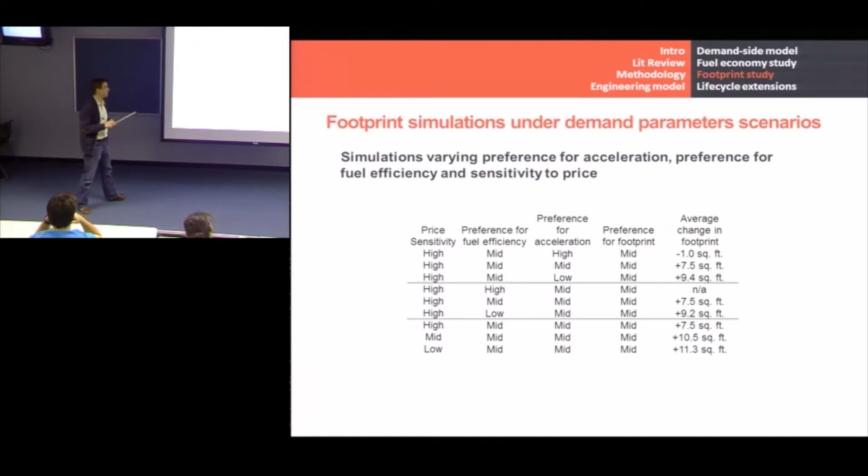These are just more results. The key is you're seeing plus signs under all these different scenarios. Now, I didn't mention that this 1.4 to 3.9 miles per gallon is 20 to 50% less fuel economy than you would otherwise have. So it's actually a pretty significant chunk. You think emissions are going to go down by a certain amount, but they don't go down by that much - it's 20 to 50% different from that because cars get bigger.

We did a back of the envelope calculation: if you take a standard coal-fired power plant, and compare the grams of CO2 equivalent this represents versus what a coal-fired power plant would emit typically in a year, it's like 3 to 10 coal-fired power plants. So the whole transportation fleet's a lot bigger than that - you can say well, maybe it's not that much. This isn't 20 to 50% of the fuel economy, it's 20 to 50% of the gains. But it's still more than people would expect, because a lot of people said cars wouldn't get bigger, since they drew these functions so that wouldn't happen. We think it is going to happen.

And we think there's a strong chance that something else is going to happen that is a little unsettling to us, but we can't really prove that it's going to be a big deal or not. But when you look at the math of this, you see that the CAFE standard...

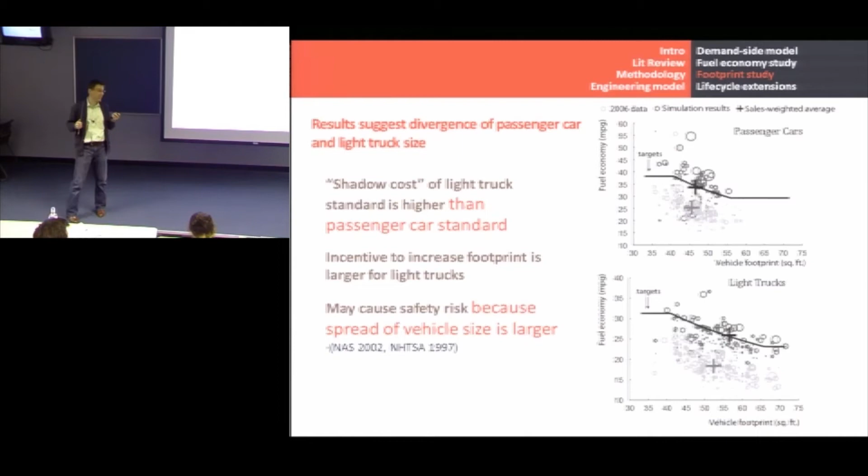So basic conclusions: there's not only some possibility for leakage from CAFE to the foreign automakers that we have to be concerned about—maybe that'll happen, maybe it won't—but there's also, across the industry, some opportunity for footprint leakage, and it's not a very small thing. Again, from 20 to 50% of the gains by Katie's work there. And there's also this concern about safety.

It would be nice if you were able to decouple these things, right? If you could put a constraint on fuel economy and a constraint on safety, that would be nice. But it's really hard to do that. You can't just stick a computer model of a car into some safety software and get a number out, right? It's a very difficult business, and decoupling these things, while it would be nice, is not really possible now.

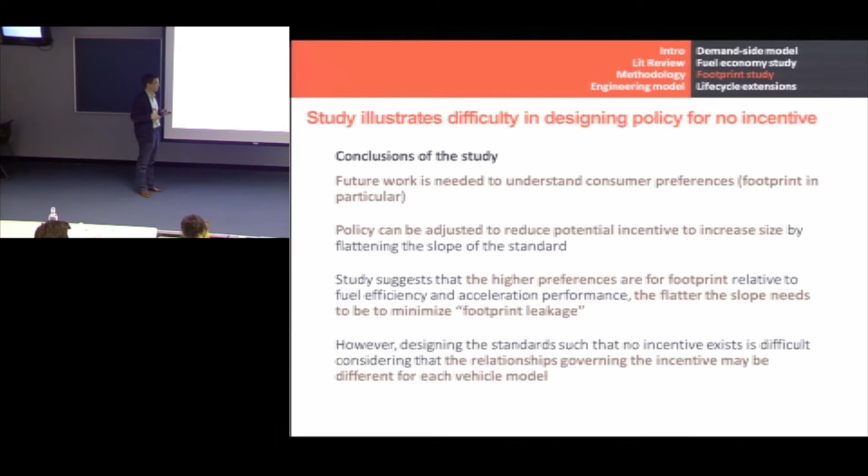Let's see if this says anything else. Yeah, so the basic upshot is, we should probably be paying attention to these things.

Sarah: So a few slides ago you showed that the German automakers don't conform to the CAFE standards. Am I correct? Or do they? Well, some do and some don't, but go ahead. So the thought that's in my head is the consumer willingness to pay for acceleration would be higher compared to fuel economy in that class. Is that the incentive for these automakers to not meet CAFE standards?

Right. If you're selling a luxury car, let's just generalize it, not to a country, but you're selling a luxury car where you're putting commercials on TV where the car is going around the Autobahn, zipping around, right? Probably the person who's attracted to that is thinking about that car zipping around, and they want to feel it when they get into the car. And therefore, just putting technology towards fuel economy and reducing acceleration might actually hurt sales of that significantly. So that is what's going on there, indeed.

So, a lot of pain on Tuesday, but what comes out is interesting. I'd like to be at a place where maybe 10 years down the road, this kind of analysis is so standard that we could be doing it routinely.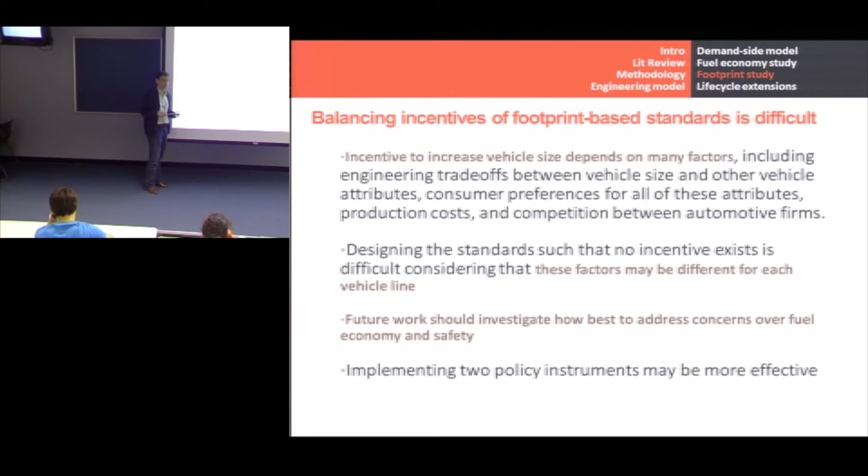That's basically what Katie talks about. We look at LCA now. We can look at input-output life cycle assessment. We can look at the International Standards Organization LCA, thinking about single products and their environmental attributes. We know sustainability has three elements - the triple bottom line: environmental, social, and economic.

Some folks are out there working on social LCAs. That's a long way from being perfect. You've got economists that have done general equilibrium models. Where Katie's work really fits in is right here - looking at an industry scale, environmental and economic considerations together. So we can call that an approach for evaluating environmental sustainability.

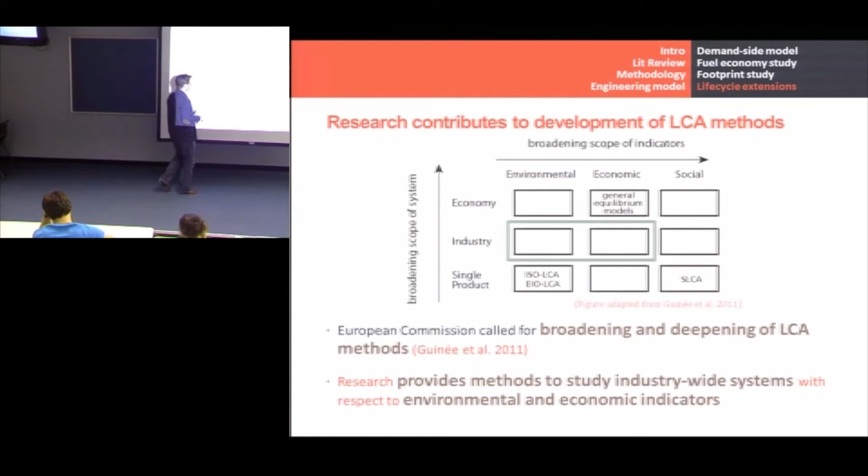So the question is, can you use this really for other products? And what would be the process for that? Well, you can think about a policy instrument that affects technology and design relationships, thinking about producer decisions, consumer decisions, and so now you basically get to a point where you can model the different industries, the producer's supply side, the demand side, and then looking upstream and downstream.

What material and supply chain options do producers have? What are the downstream disposal options? And then you basically tack on the LCA at the end. That's what Katie did. In an upshot, this is the flow.

But the question is now, and the point is, if you can do this, as long as you have the LCI data, you're good to go. I think the question moving forward is whether we can now apply this to refrigerators and washing machines and consumer electronics and the like. So that's to be determined.

Again, there may be simpler products, and we can model their design in a reasonably straightforward way as long as you've got some data. And we've done refrigerator before even. But from an engineering standpoint, and maybe the costs you can even get, but what's the nature of the consumer side of it? Can you get the market data to develop demand models? These are big questions.

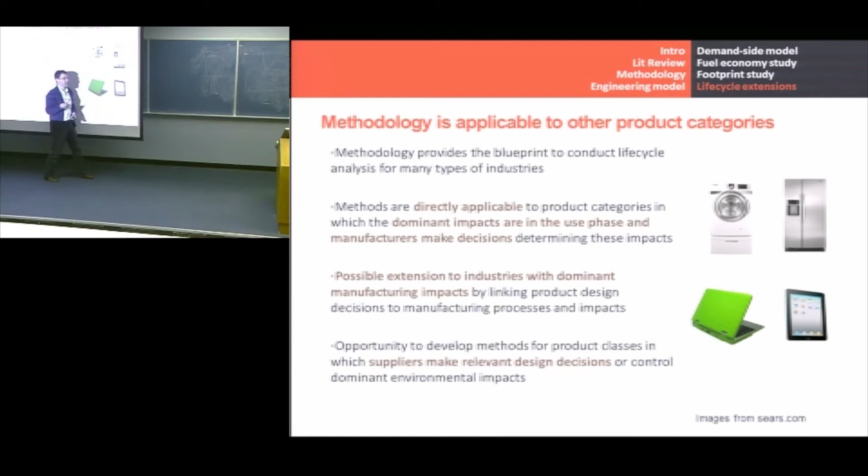The point is, are you asking a question that's so design dependent that in 2 years it becomes obsolete? If you want to look at recyclability, we don't have to talk about energy, we could talk about any attribute. Let's look at recyclability over time, the materials being used, and apply the same thinking. You definitely don't want radical changes in your industry within the time frame of the analysis, and hopefully this becomes more of a standard, not like splitting the atom the first time, which it seemed like.

Other questions? Go ahead. Who do you see mostly using this, if it could be expanded or become more commonly used? Would policymakers use it? Would designers use it in major companies for design products like you mentioned? I mean, clearly the people who made the original CAFE standards probably didn't do something this intricate.

So this is targeted towards policy, because it's of interest to sophisticated, wealthy companies who may want to manipulate the policy, and may want to understand implications so they can lobby the right way. But mostly this is about academics informing policymakers about how to achieve sustainability. You've got targets in an industry, and if you put policies in place that leak, you're not going to hit your targets. But those targets are coming from science, not made up political targets per se - they're supposed to be anyway, in theory. So I think it starts in academics.

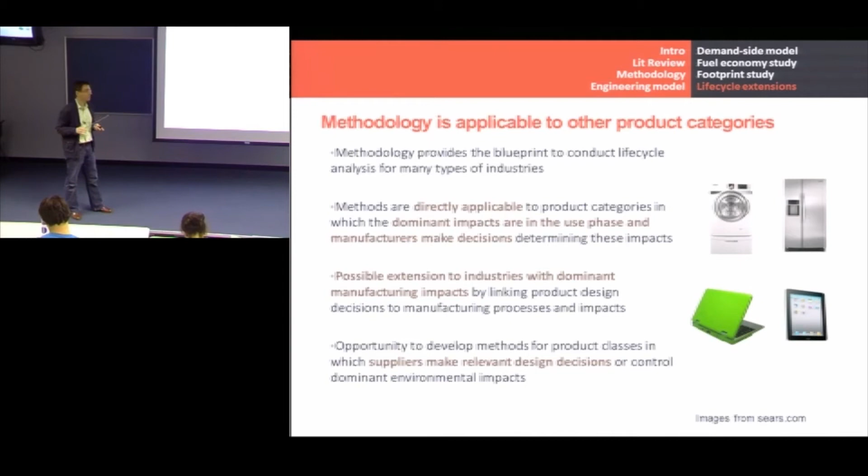Got another point? All right, there, which was Holdren something - is that John Holdren? Yeah, early on, right? He did what we call the IPAT equation, or the master equation. Question? No, just move your hand around. Okay, so I put the references there - anybody interested, readings 59 to 61 cover this stuff.

Now, we've talked a lot about fuel economy. We have not talked a lot about materials, right? Has anybody - and I know some of our off-campus students are involved with materials design for automakers - is anybody aware of some of the advances being made in terms of the vehicle itself and the materials being used there? Joe, you got anything you can share with us?

I've been reading a lot about using high-strength steel that can help lower the mass but still meet the strength requirements. There's a concern with aluminum we've mentioned before, that its production emissions are rather high. If you can lightweight using steel, you don't have the production emissions and still get the lightweighting benefit. So there are groups working on vehicles made of high-strength steel. I made a reference - I can't tell you the reading number, but it's online - this is some work we did looking at aluminum versus high-strength steel vehicles, the cost and environmental benefits. There's actually 2 papers on that if you're interested. So lightweighting is key. What else?

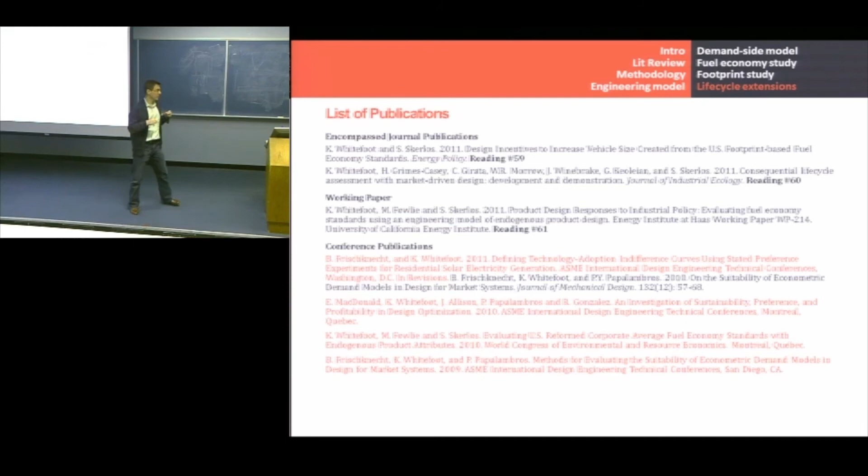End-of-life vehicle directive. Anybody heard of this? We should probably spend a minute on it. I was going to guess that most people knew about it, so that tells you what I know. All right.

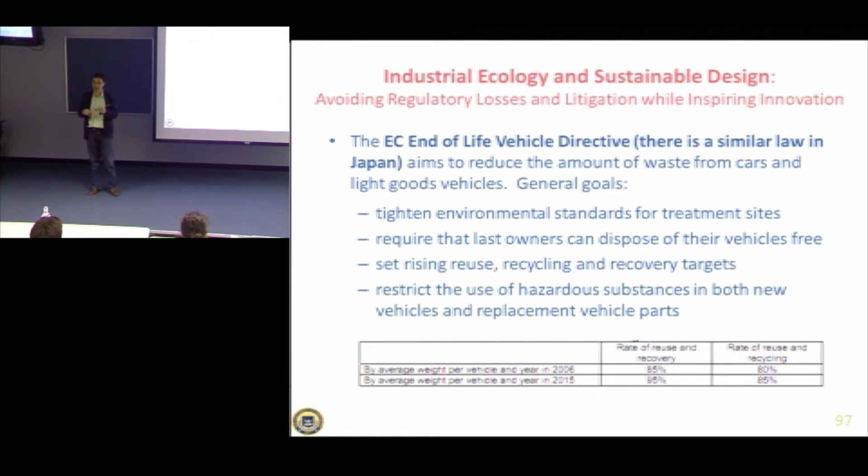There's a similar rule in Japan. Basically, in the U.S., about 82% of the mass, and different people quote you different numbers. I've heard below 80, I've heard 85 before, but somewhere in the low 80s percent of a vehicle gets recycled at the end of its life. In Europe, there's the end-of-life vehicle directive that's increasing the rate of reuse and recycling. Reuse and recycling is over here, 80 to 85%.

So this is sort of recovery targets, by mass. In 2006, going from 85 to 95%. So what this is saying is of all the mass of vehicles being retired out there, you've got to bring back into the technosphere 85% of that mass or 95% of that mass. Now, of that mass, the percentage of components being reused or recycled is 80% and then 85%.

So these are fairly significant targets. And you can't make the whole car out of metal, right? You're not going to make the seats out of metal. Well, the frame is, of course, but I meant the cushions. So there are going to be plastics in these vehicles. Plus, plastics are light, so there's lightweighting and use phase benefit of that, right?

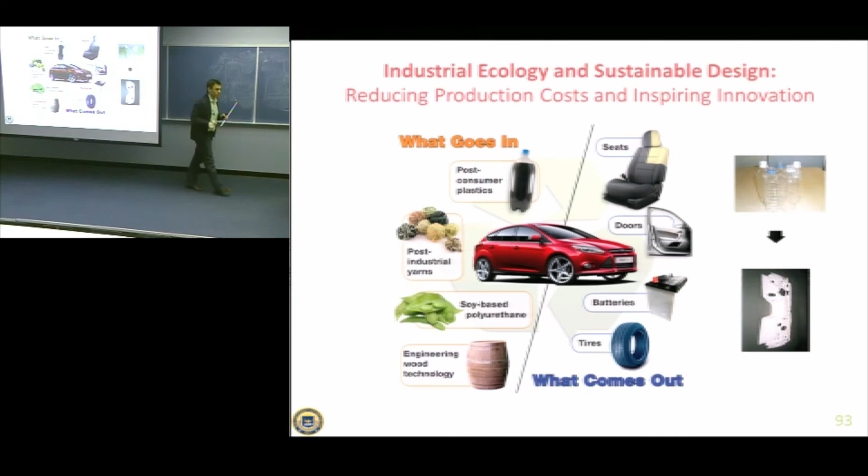So there's a big move that a lot of people are involved in to try to figure out how to take old plastics from cars or even from other industries and then convert them into components for vehicles. I think there's a slide from Ford that gives some examples of that, right? And all the companies are doing this. Thinking about renewable materials in the vehicle, and then what happens at the end of life, ranging from reuse to recycling. So there's a lot of work going in this area.

So we've talked about CAFE standards for a class and a half. I don't want you to walk away not being aware of all the work that's going on across the industry, U.S., Europe, and Japan, to figure out, okay, you've got this vehicle coming in, what can I do with it, right?

And if I'm making a new car, what components can I use that is input from either old vehicles or other waste, right? Could be soda bottles, could be old tires, could be carpets, right? Old appliances that are finding their way into new vehicles.

So what's different about the materials than the CAFE standards, right, is that, yeah, there is a push. There is regulations in Europe and Japan, and the U.S. automakers build over there too for those markets. So they've got to pay attention to it also. So there is a regulatory push.

But when you stop and think about it, most of these components are not directly observed. So they're good spots, if you want to make the carpet out of old soda bottles. Well, great, because the consumer probably isn't going to know, and it's cheaper. Right? So there's a lot of this work going on.

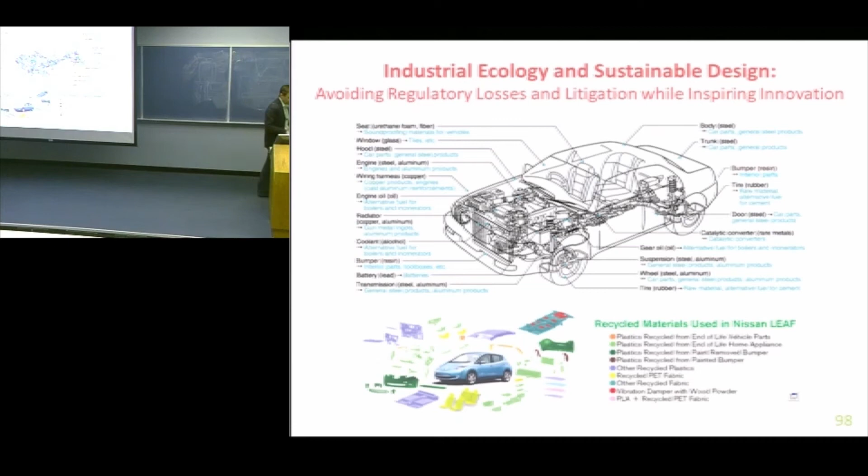So in addition to what we see in the use phase and powertrain and lightweighting for higher fuel economy, there's work going on for recovery, for reuse, and designing for that recovery and reuse. So that involves how do you disassemble the vehicle? If you have two plastics that are similar in the vehicle, can I either design to just use one, or can I develop a technology to separate those two, even though they look similar at the end of life? Can you use recycled materials, right? Whether they're recycled from other old vehicles or from other industries.

Renewable resources. This is flashy. We're going to make seat foams out of soy. Not always maybe the wisest thing from a life cycle assessment perspective, but certainly the idea of using renewable resources is attractive, and that's a selling point for a vehicle.

Expanding utilization of used parts or reuse, reducing substances of concern. Remember on the review for exam 1, I talked about the REACH directive. Substances of concern is what that's all about—the ones that are regulated, called substances of concern here, trying to figure out how to reduce those.

And then, deploying recyclable structures for vehicles. If you think about that, this is way out there, because you've got to worry about safety. But using Joe's example of high-strength steel or aluminum, those are highly alloyed components. If you have a body in white that's light-weighted, the opportunity to recycle that material into exactly the same body, or the same aluminum grade that can withstand a crash, that's beyond the reach of engineering right now. So they're working on that.

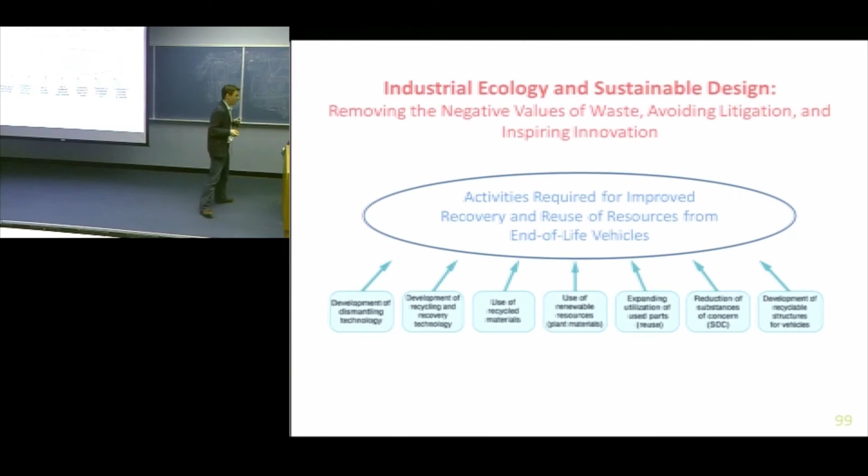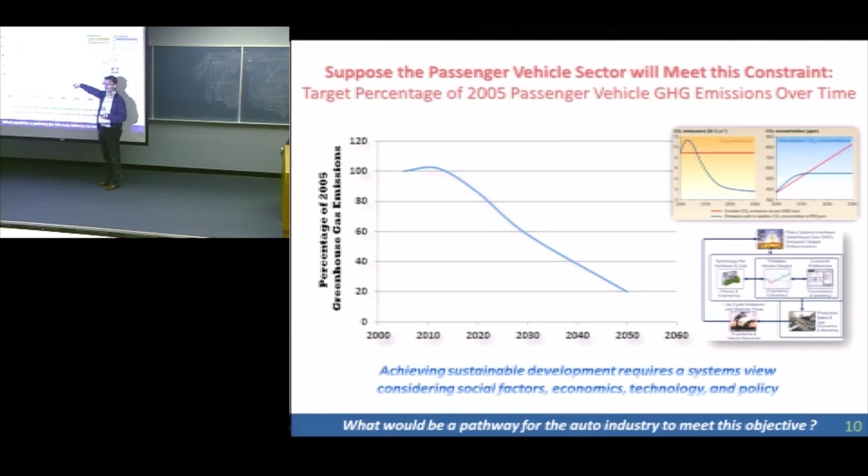As we conclude here, I want to go back to a slide related to what Sarang presented, and talk for a few minutes about it. If we're going to reduce greenhouse gas emissions by some factor—generally 80% by 2050—if we're going to avoid what's called dangerous anthropogenic interference, so talking about 2 degrees C roughly for greenhouse gas emissions, the question is, how do we do that? We've got technology, and I really like this slide that he presented here. All these different things that we could be thinking about.

What I'd like to start the discussion by asking the class is, if we just take the auto sector out—let's say we're trying to get an 80% reduction just in the auto sector, not economy-wide, but just in the auto sector—how many people think it's possible to do that? Just taking a vote. Everybody understand the question? 2050, 80% by 2050. The question is, how many people think we have the ability, technologically, to reduce greenhouse gas emissions from vehicles by 2050, by 80%.

Okay, let me ask it the other way. How many people don't think we do? Okay, so that's a minority. So let me ask that group: what do you think is keeping us from being able to meet the 80% reduction from a technological perspective?

Go ahead, Nicholas. Behavior. So we're going to drive more? Is that the main issue? Don't care about actions—it's all about consumption. So the question was asked a little bit differently; it was about the technology.

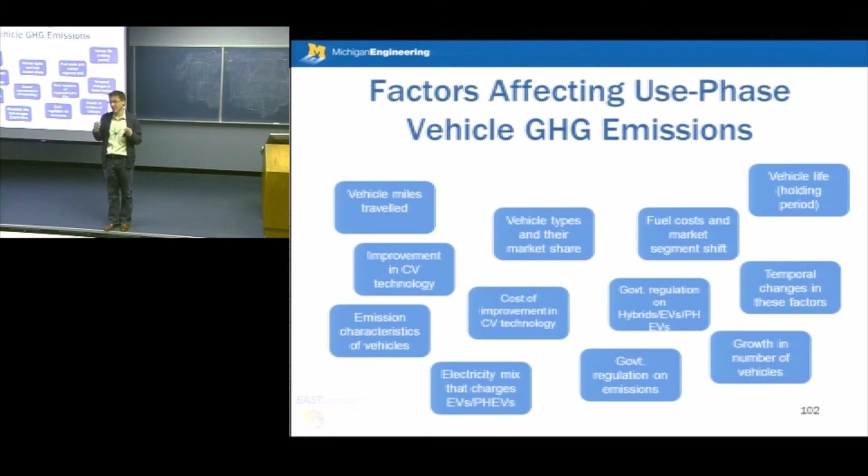But we did an interesting thing with a PhD graduate a few years back. We took a demand model using data from 1990, and put the cars from 2005 into that model, wanting to know if it would predict the prices of 2005 cars - basically the willingness to pay that people have. And it nailed it. In other words, there was something inherent to the consumers that was constant over that 15 years. What that says is, a lot of people are mentioning values here, and that consistency over time is maybe a bigger concern.

Because if the hearts change, then the wallets would change, and the companies would be all right. But you can't have those two things out of sync, right? Clearly. And then the companies - there's so much money involved with rolling out a new car that obviously they're going to be conservative about it.

Go ahead, Pete. Yeah, and I think a lot of the time, politics - all these companies are supporting the politicians behind all these decision-making powers, right? And if they don't see the consumers asking for them to do something, they're gonna put the money into lobbying to keep the same old regulations they have in place right now. So I think really the big question is behavior change, and can we get that? And I think that has to start from education.

And what I'm not seeing now is that sort of interdisciplinary, multidisciplinary piece of education where you get the policy people, the econ people, and the technology people together, right? Programs like Interpro are doing this, but I'm doubtful that this movement is going to happen fast enough for us to meet this target.

So Pete's got the last word here, and I want to add to that by saying largely engineers are not involved. As I look at this discussion we're having, and the discussions happening nationally, I think engineers are in a great spot to understand all these issues. They can't work alone - you need to have the people in the room - but in terms of being able to grasp all the issues and the decision making among trade-offs, that's an engineering skill, and engineers are largely absent. So I think that is part of the culture change here.

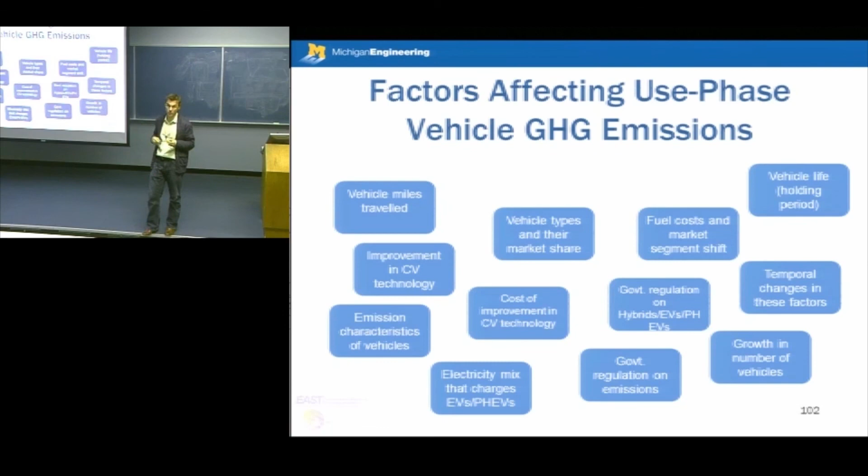I'd like to see more folks like you in those kinds of discussions moving forward. I think it's just going to be necessary - these issues are complex, right?